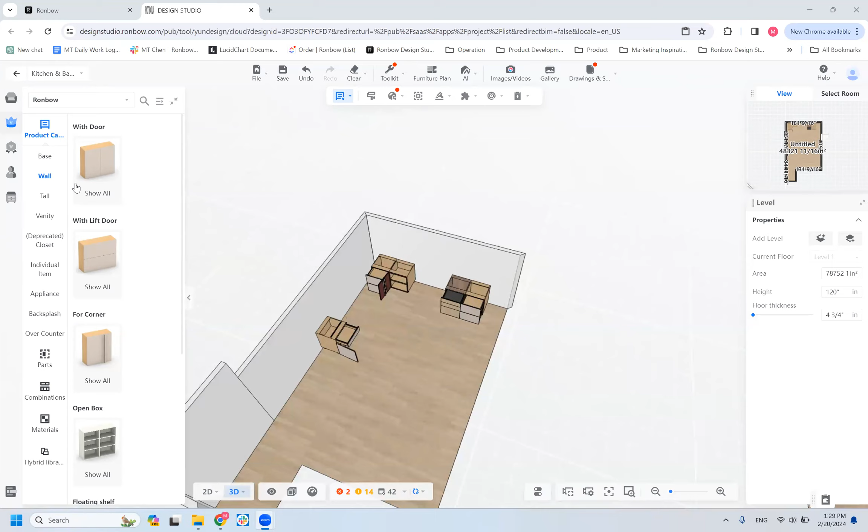Okay, so continuing on all the base cabinets with different functions. We'll briefly go over the cabinet with doors, with drawers, with doors and drawers, and then for sink.

I just want to give special mention to one of these cabinets, this one, B1D farmhouse sink apron. This is designed for apron sink, the farmhouse sink.

So for the apron sink, there are mainly two different types. The first one that's very common - one of the very common apron sinks will have the whole apron finished on all four sides. So basically this kind of apron sink just drops into or sits on top of the base cabinet. For this kind of apron sink design, we basically just use the regular base cabinet and reduce the height of the cabinet, and then this apron sink will just sit on top of that base cabinet.

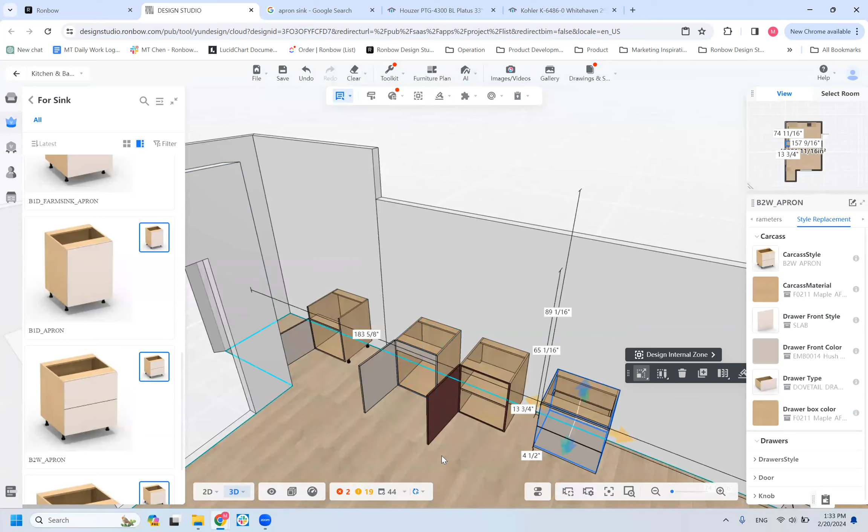Okay, so same thing for this cabinet B2W with apron. So same thing here - inside this cabinet...

Okay, so same thing for the two drawer cabinet. On the right-hand side, this one is the regular base cabinet with two drawers. And then this cabinet on the left-hand side is the base two drawer cabinet with the apron. So that's the apron front inside of the cabinet. And for the cabinet with the drawer, you can see the drawer box height is actually different, right? Because for the regular base cabinet, we want to fully utilize all the space inside this cabinet, so the drawer box will be 10-inch height on both the top and the bottom.

But if you have a cabinet that's designed for sink, well, the first thing is you'll have to change the drawer box to a U-shaped drawer, and we'll go over later on how to change the drawer box to U-shape. But also the height of the drawer box - with this apron sink on top, which is controlling the space that we reserve for the sink, now you can see the drawer box is shorter, to give you enough clearance for your sink on top of this cabinet.

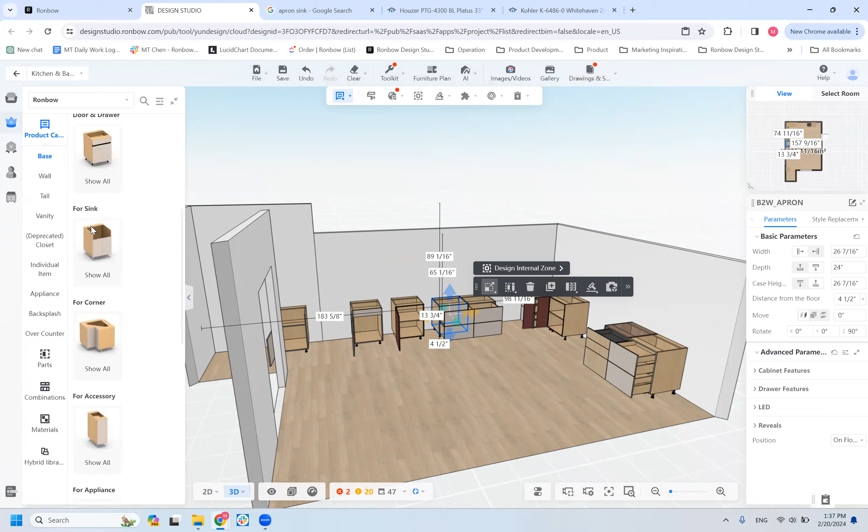So for example, for sink cabinets, one very common design in kitchens is a cabinet with a false front on top, which doesn't have a drawer box, and then a door on the bottom. If I need a cabinet that has a false front on top and two doors on the bottom, I think that's a very common design for a sink cabinet.

What I need to do right here is on this cabinet: as a default, it will have a drawer box on top. So I can go to the bottom left corner, here is the resource manager. All the basic features and style changes, you can change on each single cabinet on the right side toolbar. But if you want to modify anything inside this cabinet, more advanced features, you have to go to the resource manager. It shows here the cabinet I selected, B1W1D.

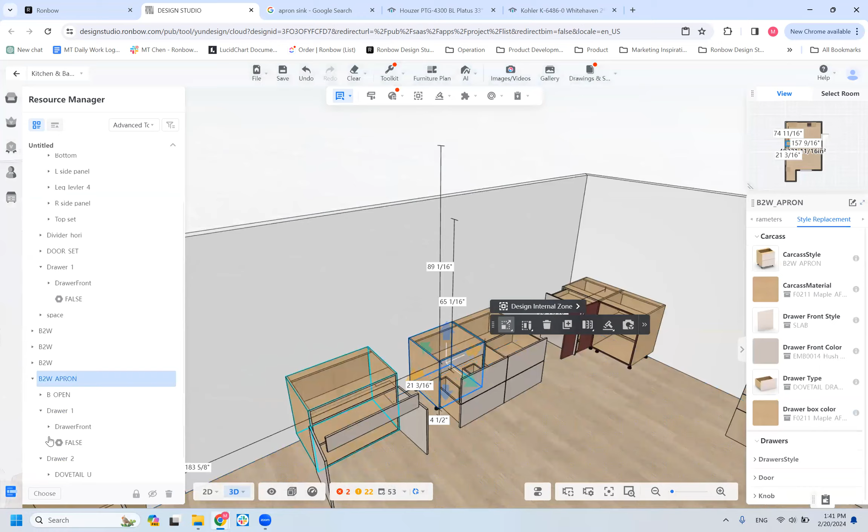And one more thing for the U shape. For example, this two drawer cabinet right here, I have changed my second drawer, drawer two, to a U-shaped drawer. On the left-hand side, the resource manager, the dovetail U for the U-shaped drawer, for drawer two. As a default, the U-shaped cutout will be 10 by 10, meaning the U-shaped cutout will be 10-inch wide and 10-inch depth.

And then you have the drop-down menu right here, and you have the option for a 12 by 12 U-shaped cutout. You can see the cutout is bigger right now, so it will be 12-inch wide, 12-inch depth.

Excuse me, sorry. Ying. Audra's trying to join, it says. Oh, she's texting me. Okay. Thank you. You're welcome.

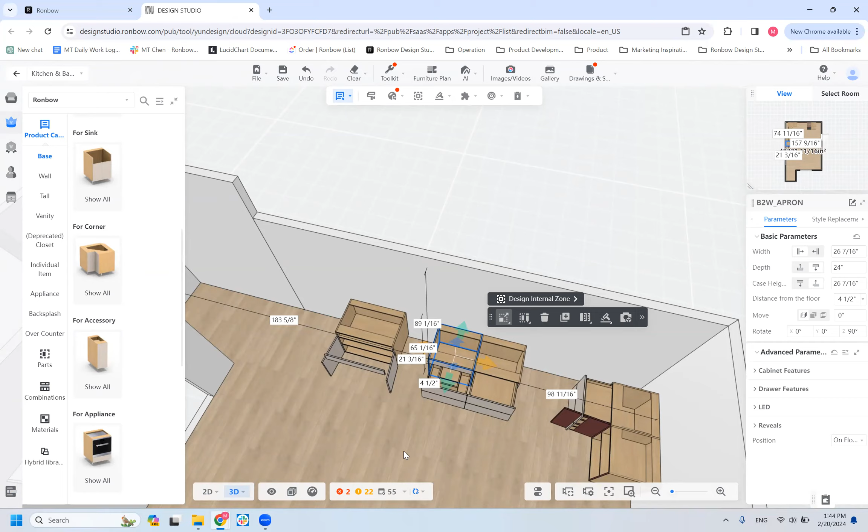With the U shape, how big of a cabinet in width can you use with that? And the U shape is for the sink insert, correct? I'm assuming it's mainly for the P-trap. Oh okay. So it's for the pipe, but what size sink will actually fit in the opening? So basically the size of the sink that will fit still depends on the cabinet width.

Correct, but you still need a U-shaped cutout on the bottom of this cabinet, for the P-trap below the sink. The U-shaped cutout will be on the drawer box. Okay, got it. Now I see it.

So all this modification that I just did - how to change the front, how to change the U-shaped drawer - anything that's inside this resource manager. I know this is a little complicated, more steps than just changing the basic dimensions. So for this part, we have a training document created as a PDF that will introduce step 1, step 2, step 3 - each single step where you need to click. We will share this training document with all the training links after this meeting, so you guys can reference it later on.

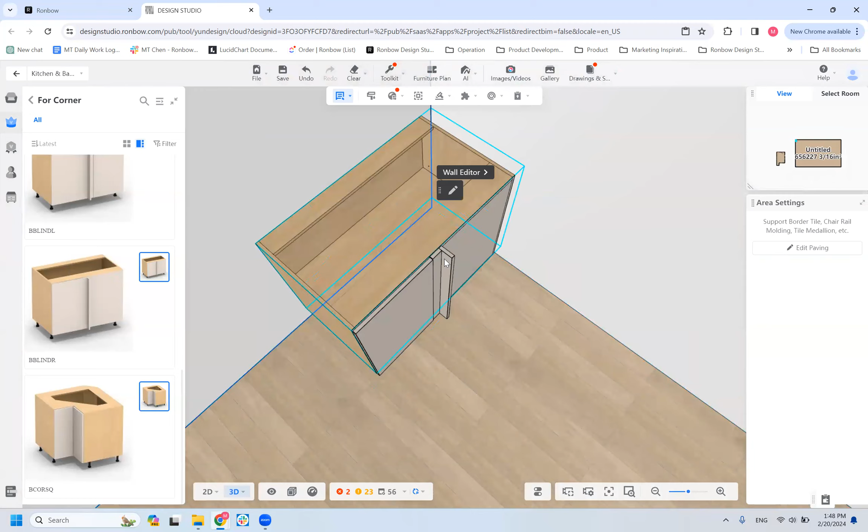This blind corner here already comes with the filler at this corner - not like in 2020 design. Usually for the blind corner cabinet, you have to draw the cabinet and add additional filler on the adjacent side. But in this design studio tool, we already set up this corner cabinet to have this filler attached to the cabinet already, so in your design you don't have to add additional filler in this corner.

Same thing for the space behind this corner cabinet. Usually with 2020 design, for all corner cabinets you have to manually put the cabinet toward a wall and then manually add 3 inches of space behind it. But this is already set up in Design Studio - there will be 3-inch space behind this cabinet already. So you just pull this cabinet and snap it to the wall, and there will be 3-inch space behind this corner cabinet - no need to pull or push it.

As a standard design, yes. But you do have the availability to adjust this filler space. The first thing to mention is the filler width - as mentioned, this cabinet already comes with two fillers. As a default, this filler width will be 3 inches, but you can always modify it from a minimum of 3/4 inch to a maximum of 6 inches.

So just in case some special design requests a bigger space on the corner, here is how you can adjust the filler width. But keep in mind the filler width will be adjusted on both sides at the same time, because we want to ensure a symmetrical design. But as a standard, it will be 3 inches.

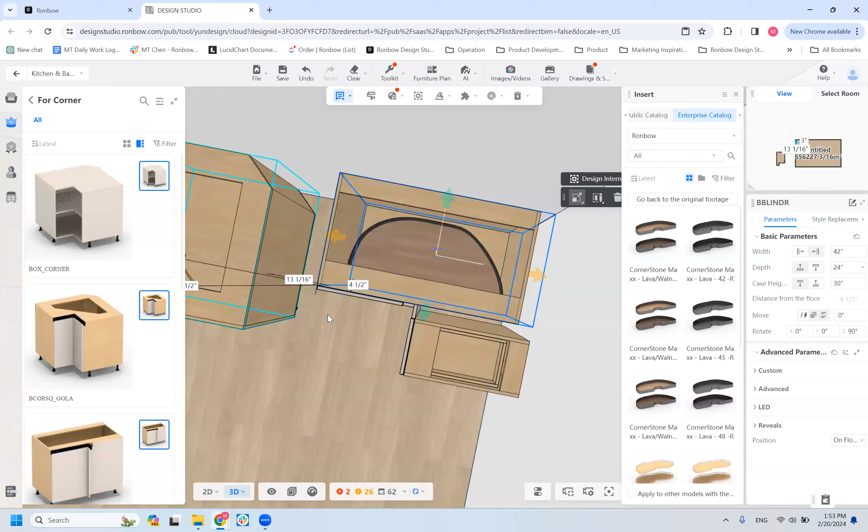I have a question if you can hear me. Yes. Is there a catalog that we can reference, like a paper catalog? When we're designing this, do we have some type of material to reference? You mean like what kind? You mean a physical one? Like let's say the first top one, the Cornerstone Lava Walnut, whatever.

If you click on it, either one, doesn't matter. So click on it. Yeah, I read it. It gives you a little bit of information on it, but if we're not sure which one to use, is there documentation that we can reference, what kind of catalog information?

What kind of reference are you looking for? For example, Cornerstone Max Lava 42R. What does that mean, R? I'm assuming it's right, I understand that. Yes, but so what does that mean in my design? So the Cornerstone Max basically is the name for this accessory, and then Lava is this color name.

What is it made out of? How do we know? Okay, yeah, exactly. How do we know how to pick it and which one to pick? And if we had like a catalog or something, like a Blum catalog, for example, when you open it, you have the description of the product and you know what to select.

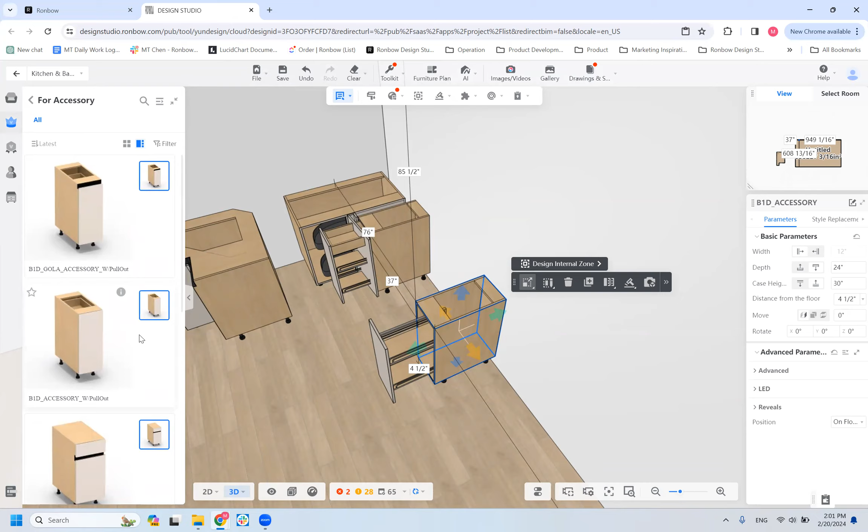For accessory cabinets, there are different designs: starting with the base cabinet for four-high door, then the base cabinet for four-high door with one door on the bottom and one drawer on top, for four-high door Gola with one door and one drawer, and four-high door with drawers on top. This one here is with the pull-out drawer on top. With all these different cabinets for accessories, each has a different internal opening height. For example, this four-high door has the full 30-inch height access for accessories, but this one, the four-high door with one roll-out drawer on top, the roll-out drawer takes up lots of space, so not all accessories are able to fit underneath it.

Inside this cabinet, once I click on it and go to style replacement, you will see all the accessory options here. We don't have all the information listed, but you can see the description, the metal space pullout, and the size of the pullout. This number here references the width of the cabinet. When I select a different width of accessory, for example this one for 24, my cabinet's width changes to 24. So the cabinet width on the accessory cabinet is according to the accessory you have selected.

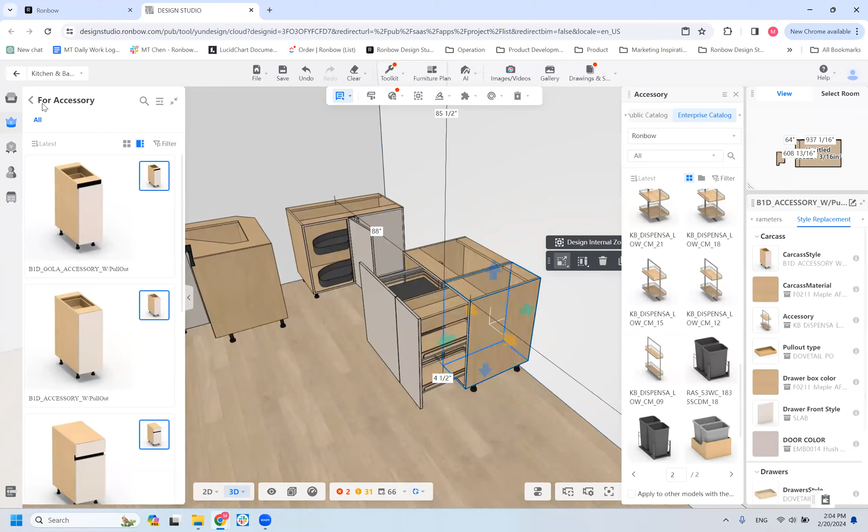Okay, so move on to the next one for appliances. So for the appliances cabinet, same thing, there is different configuration.

So we have the one drawer on top of the appliances. So all these are base appliances cabinets, okay? We have one drawer on top of the appliances, a filler on top of the appliances, one drawer on the bottom of the appliances with Gola, one drawer on top, one drawer on bottom, two drawer, and then one drawer on the bottom. Okay, so for all the appliances cabinets,

Once you place your cabinet in your drawing, right here, here's the thing I want to mention. So all these dimensions here, so the cabinet height is basically the overall height of the cabinet, which will be the same as other cabinets.

Okay, so this drawer box height right here is basically controlled by these appliances, right? So the designer does not have control on this drawer box height.

So how we set up in the design studio is that for all the appliances cabinets with this kind of built-in appliances, you have this option right here called appliances. Once you click on this appliances, you'll see all the appliances options.

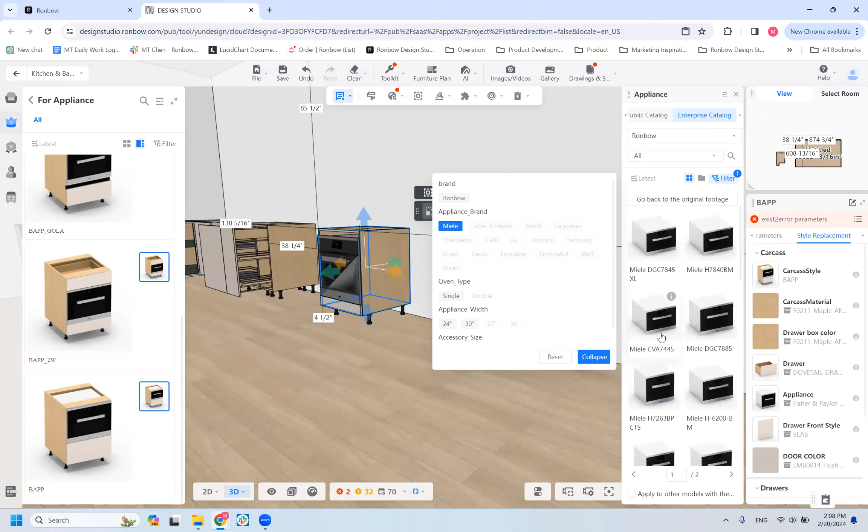So the appliance request form is something separate from the design software? Yes, it's a form that you guys have to fill in, but it's just basically — you just need to fill in the brand of the appliance and the appliance model number. Okay, yeah.

Okay, any other questions on the appliances cabinet?

Okay, so the next cabinet on the base cabinet will be the open box.

Okay, so for the open box cabinet, a very important thing to mention: for the regular base cabinet, the width, depth, and height all reference the cabinet carcass, the cabinet body. So the cabinet depth of 24 does not include the door, it's for the cabinet body only. But for the open box, we want to make sure the front of the open box is aligned with the cabinet door, not the cabinet carcass, so everything is set flush.

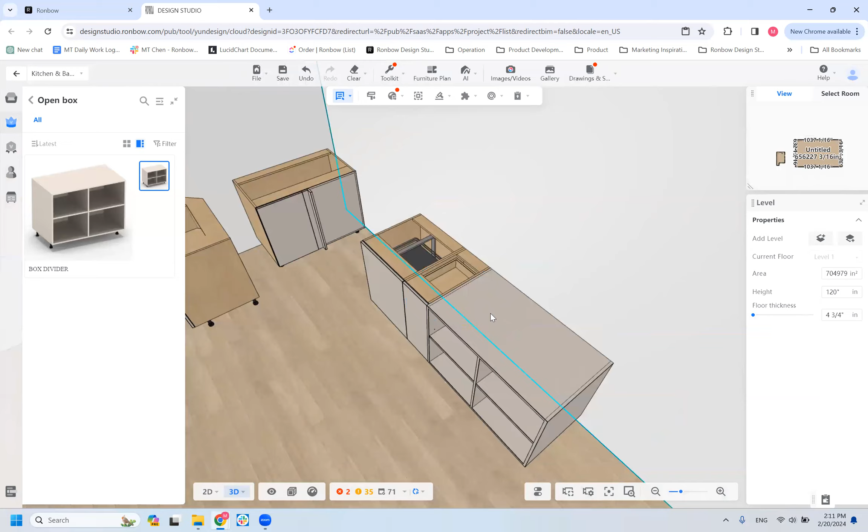So it's easier - when you're modifying your base cabinet to, let's say, a 26-inch depth, and you have an open box right next to that base cabinet, you don't have to manually calculate the depth needed to align with that 26-inch cabinet plus the door bumper. You basically set the open box to the same depth as your base cabinet, whichever depth you want to align with, and the system will automatically calculate the front edge right here.

Okay, so for this open box, this feature right here is called a divider. It's the same for the open box and all the wall cabinets. Once the cabinet is bigger than 42 inches wide, you will automatically have a vertical divider in the middle of the cabinet. You can always change the number of dividers. Since my cabinet size is now 44, bigger than 42, the minimum divider we'll have is 1, and I can change it up to 4 dividers inside this cabinet.

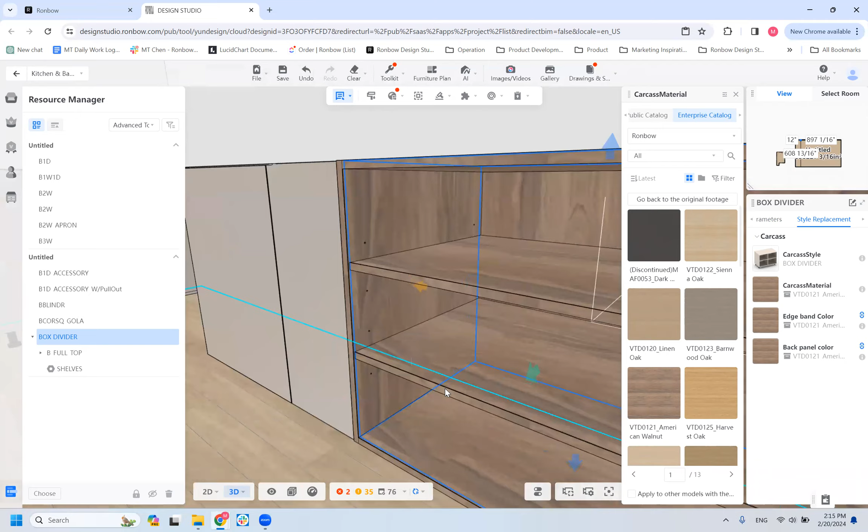But what if I just wanted the interior a different finish than the outside? That's currently not available - for the open box, you're seeing the same finish on both sides. You mean a different finish for the shelf only, or just the interior, the shelves and interior of the cabinet? That basically depends on the material you're using. For this open box, if I select American walnut, this material has the same finish on both sides, so you'll basically see the same finish inside and outside - there's no difference, no different finish on both sides.

But when we're using a matte finish material - still on the drawing it shows the same - but right here you'll see an option: finish side facing in or finish side facing out. This finish side tells you that most wood textures have the same finish, same texture, on both sides. But for high gloss and matte materials, the high gloss or matte finish side is only on one side, so that's something you can change - the matte finish can be on the inside of the cabinet or on the outside. But it still has the same color.

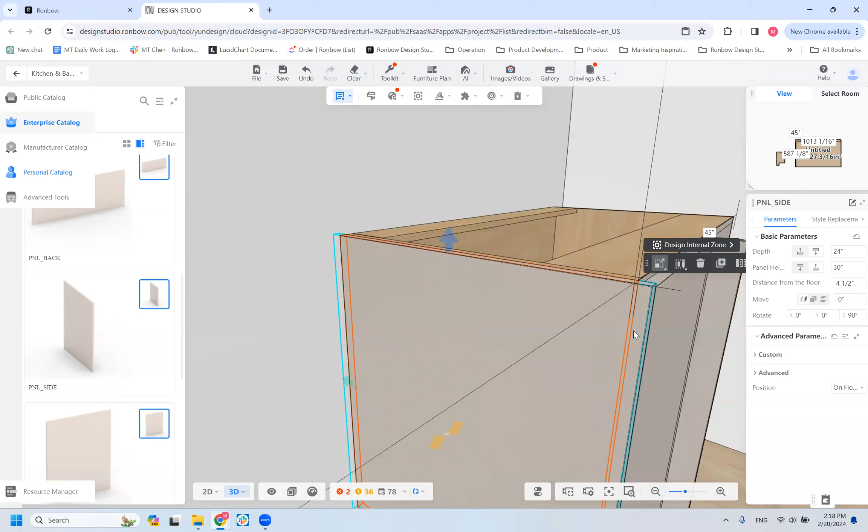And then you see the space between the red line and the green line right here, that's the overlay that the engineer team has already preset in the design software. That's something that helps you with the design. Doesn't matter what your cabinet size is, the side panel will always be flush with the cabinet door, the front edge right here.

One thing in the advanced tool: all the side panels will have a depth oversize of 1 inch and a height oversize of 1 inch. You can see the drawing right here, the green line behind this panel is kind of sticking inside to the wall. That's something that's designed for all the side panels.

For example, this panel right here, you have a cabinet that's 24-inch depth. This front overlay is calculated with the door thickness of 3/4 inch plus the door bumper of 1/8 inch, so a total of 7/8 of an inch on top of that 24-inch depth. But the real panel that we send out to the customer will have an additional 1 inch on this depth, since not all walls are perfectly straight - I would say none of the walls are perfectly straight. So all the side panels we provide will have this extra 1 inch depth, and the contractor will have to trim the panel on site during installation.

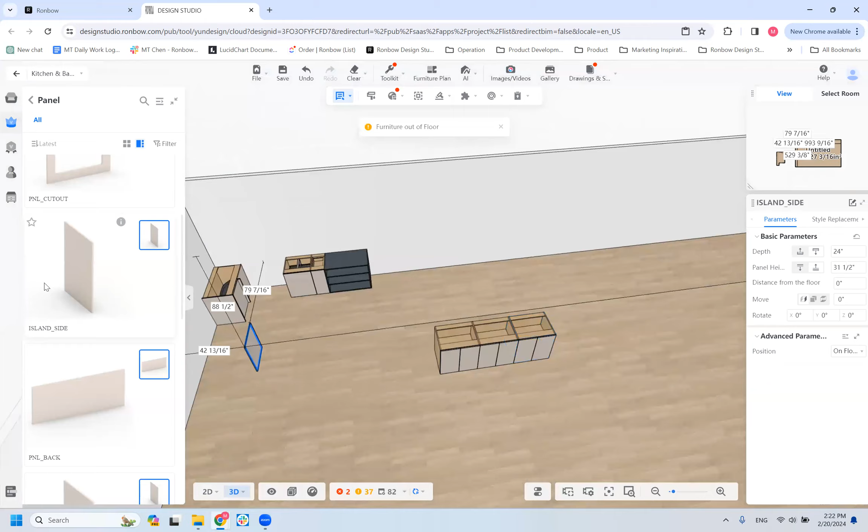Okay, we'll move on to the island side panel. For the island cabinets - for example, I have an island designed in the middle of the room. The island side panel will be attached to the side of the island. No questions?

So the difference between this base side panel and this island side panel is that for the base cabinet side panel, since one of the edges is attached to the wall, the contractor will have to trim, modify this panel on site, and the edge that has been cut will be attached to the wall - so it's not going to be visible after installation.

But for the island side panel, both the front edge and the back edge will be exposed after installation, since this panel is not attached to any wall. So this island side panel will have to be exact size, and the contractor will not need to trim this panel on site.

For this panel, this blue line right here is the depth of the cabinet, so it will be aligned with the 24-inch depth cabinet. On the front here, you'll see the overlay, which is aligned with the cabinet door - that'd be 7/8.

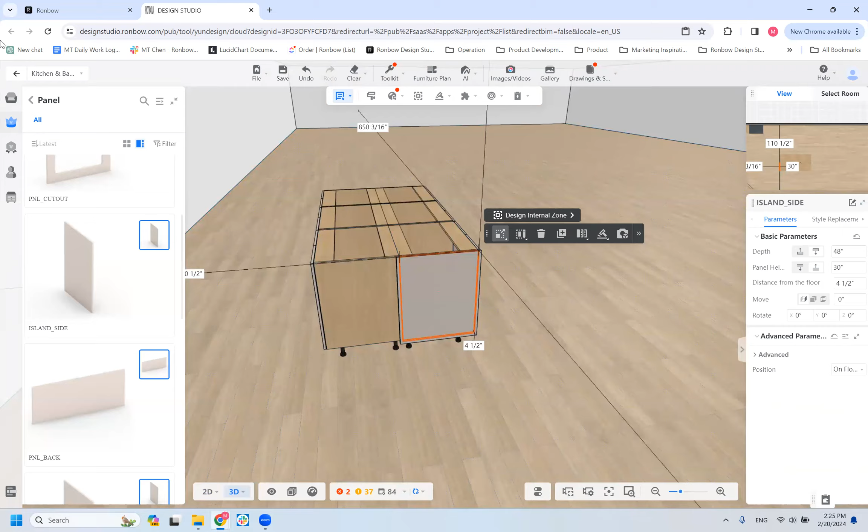So to move this panel in this situation, I want my panel to be the same location as my cabinet. So when I click on this cabinet, it shows me from this cabinet to this wall the dimension is 86.5. And then I just need to click on my panel, same thing here, 86.5. So now my panel is in the same location, the same placement as my cabinets.

And back to the 3D view. So for this island side panel, the panel width will be the two cabinets' depth plus the front and the back reveal. Any questions on the island side panel?

And then again, since this panel has to be the exact width, the contractor cannot trim this panel on site. Both the front and the back edge have to be finished edges. So there's no oversized option on the width, but it does have the oversized option on the height. So you can either have this panel the same height as the cabinet, or you can have this panel go all the way down to the floor.

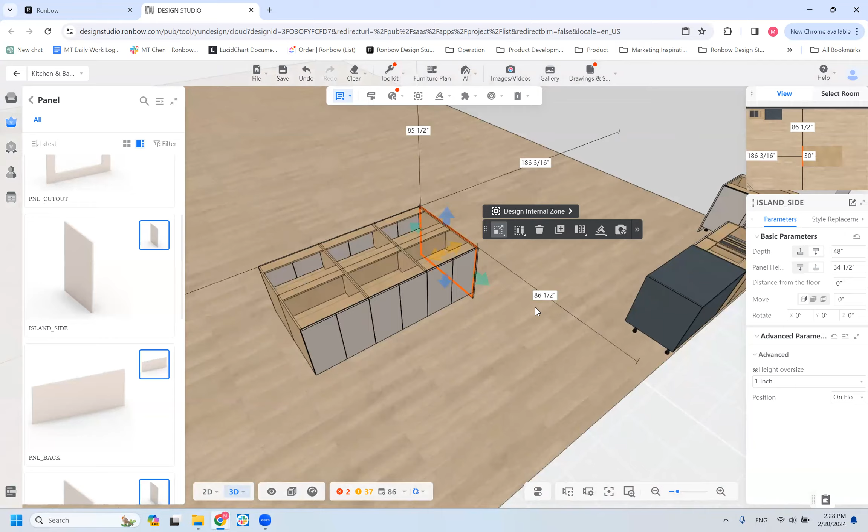Was it finished on the other side of the panel, like when the door opens? Can you see? Yes. Is it the whole panel or just like an inch of it or something?

Yeah, it's just a regular panel, so I can move it over here. So yes, it does have finish on both sides, but just keep in mind for the high gloss and matte material, the high gloss or matte finish is only on one side. So one side will have the matte or high gloss PET, and the other side will just have the melamine with the matching material.

Okay, so when the contractor is doing the installation, they will definitely want the matte finish or the high gloss finish side facing out, to be the exposed side that we'll see. I see. Okay.

And then move on to the next one. Same thing on the island. Let me change my island design. Just give me a second.

Okay, so another situation on your island design, you might have end panels on both sides. And then on the back, I don't have another row of cabinets, I just have a back panel on the back of my cabinets. So here's a panel back, which will be the panel that can be used on the back of your island.

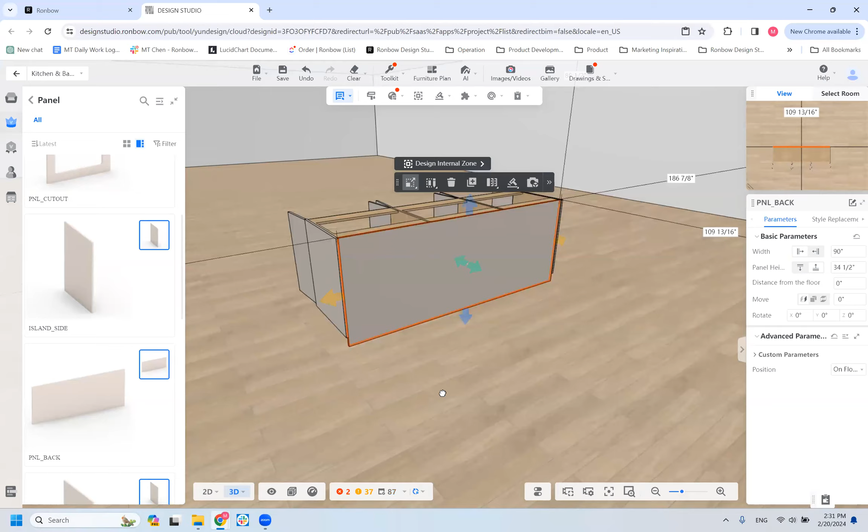Okay, so here's the island back panel. For this panel, we usually just provide the exact height and width, because there's no additional calculation—it's just the 3 cabinets adding up together. So there's no preset overlay for the front, unlike the side panel, which always has a preset for the front edge and back edge. But for the back panel, that's the dimension you get. So for this design, my cabinets are 30 inch, 30 inch, 30 inch, so the total is 90 inch width. That's it, there's no additional reveals or oversize.

But here is an option for you to add oversize, just in case some customer might worry that on the job site there might be some miscuts or something. If the customer prefers to have oversize, you can always change that here. You have the option for oversize height and oversize width.

One more thing I want to mention about this panel: for the material, as a default, all wood texture material will have a vertical grain. Once I select a wooden texture for this panel, it will automatically give me a horizontal grain. The reason is that with a vertical grain, the maximum width of this material only goes up to 48 inches wide.

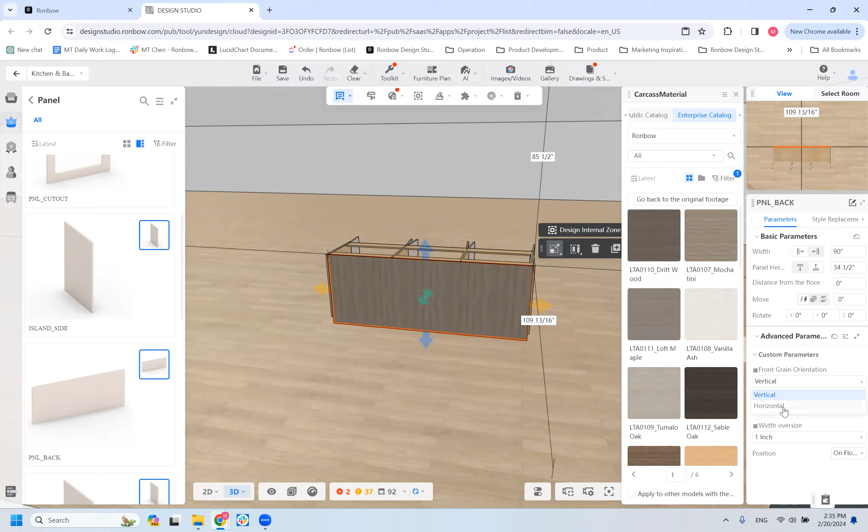So what do we use to seam that if we go with two 48-inch panels? You mean how to do the two panels? Well, you're gonna have a seam in the center, right? Yes, yes, what would you do there? Avoid it at all costs, but vertical may be the way to go because the side panels and the rest of the kitchen are most likely gonna be vertical.

So since this issue only appears on the wood texture panel—if it's a solid color, it doesn't matter what direction, right? And since there's no grain... for the solid color, since there won't be any grain, there won't be any issue when you have a 90-inch wide panel. But for anything with grain, yes, you will have to break it into two panels if it exceeds the maximum width.

But we have a couple of this kind of design situation in our showroom. With all these wood textures, I wouldn't say the seam is very noticeable, so it depends on the customer if it's acceptable for them. If they wanted vertical, we'd have to use 48-inch panels.

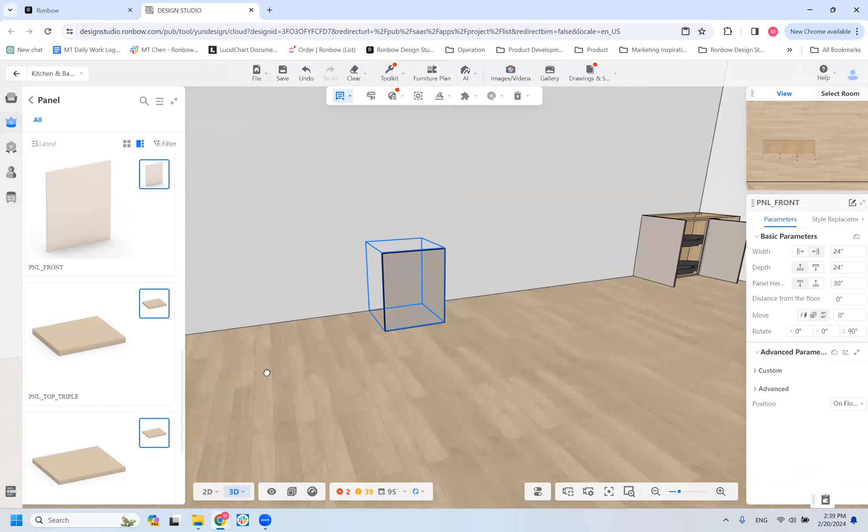Next, I want to go over the panel front. The panel front is basically a front panel, designed for appliances that require a custom panel ready front. So that can be used for the custom panel.

For example, if the customer is using a panel ready dishwasher, then you should be using this panel front as the dishwasher panel.

The width and height of this front panel will always be set the same as our cabinet carcase width and height. And on the bottom here, this front panel will have the same reveal as all the base cabinets.

Earlier, when we used the side panel or the island panel, there's no reveal on those panels - the side panel and the back panel have no reveal. But this front panel does have reveal for the top, bottom, left, and right, set up with the same reveal as the base cabinet.

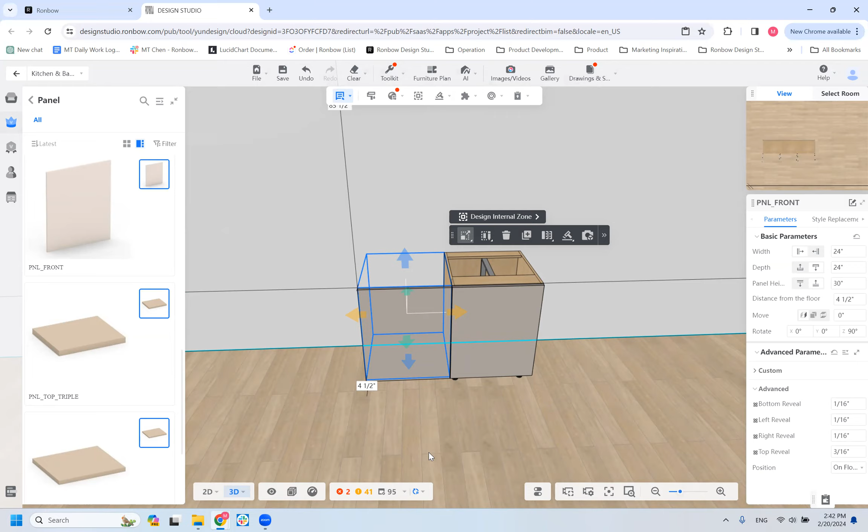For most appliances, most dishwashers, this standard reveal will work. But for some special dishwashers, like a dishwasher drawer, which won't be the same height as our base or high door cabinet, don't expect those kinds of appliances to align with our cabinet - or you have to adjust the cabinet height, like the drawer height, to align with that drawer dishwasher.

Otherwise, for most appliances, we'll just be using our standard reveal, and the door height will be the same height as our cabinet. If you have any special appliances, like a dishwasher drawer, you have to follow their spec to input the width and height of the panel based on the spec requirement, and in that case you'll have to remove all the reveals on the bottom.

So that's the front panel. And then we have another panel that's very similar, which is this panel cutout.

It's also a front panel, but designed for the front panel of the wine cooler. A lot of times the wine cooler will have a cutout at the center for the glass insert. So this panel is a front panel with a center cutout.

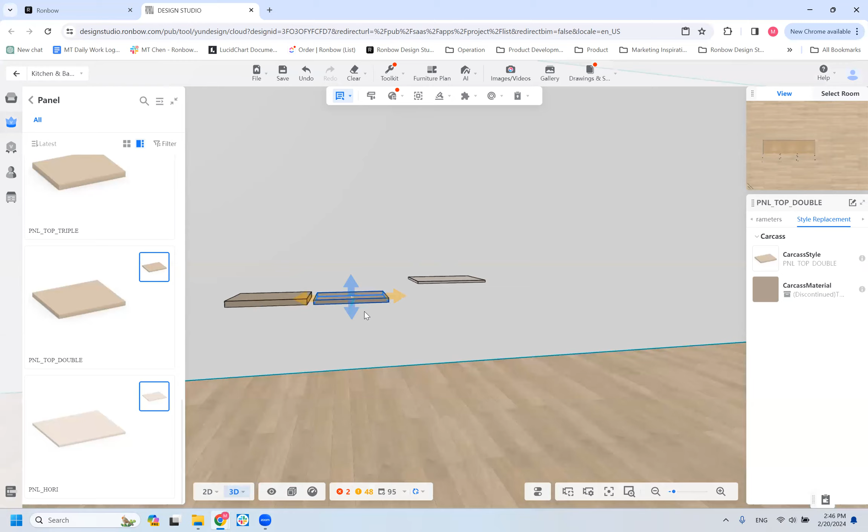And then we have this panel with double layer, panel top double, and we have the panel top triple. The double layer will just be 2 layers of the 3/4 inch panel, which means the thickness of the panel will be 1.5 inch. That's the thickness of the panel. And then we have the triple layer, which is basically 2 of the 3/4 inch material plus 1 of the 1/2 inch material. So triple layer means 2 inch thickness.

One thing I want to mention for the horizontal panel: when we have a single layer horizontal panel, in the style replacement you can basically find all the material options. You can use any of the material for this single layered regular horizontal panel, because it's just a regular panel. And then if you have a double layer or triple layer panel, you can see the material option is a lot less than the single layer horizontal panel.

For the double layer or triple layer horizontal panel, we need to make sure that on the edge of that panel there's edge banding on all edges of the panel. Because even though it's 2 layers of material stacked together, we don't want to see 2 lines of edge banding on the side. So for the double panel and triple panel, we want to make sure this material itself comes with the 1.5 inch edge band or 2 inch edge band. That's why there is a material limitation on these 2 products. All the material options you see in this product basically means all these materials will have the 1.5 or 2 inch edge banding. So there's a limitation on this product itself.

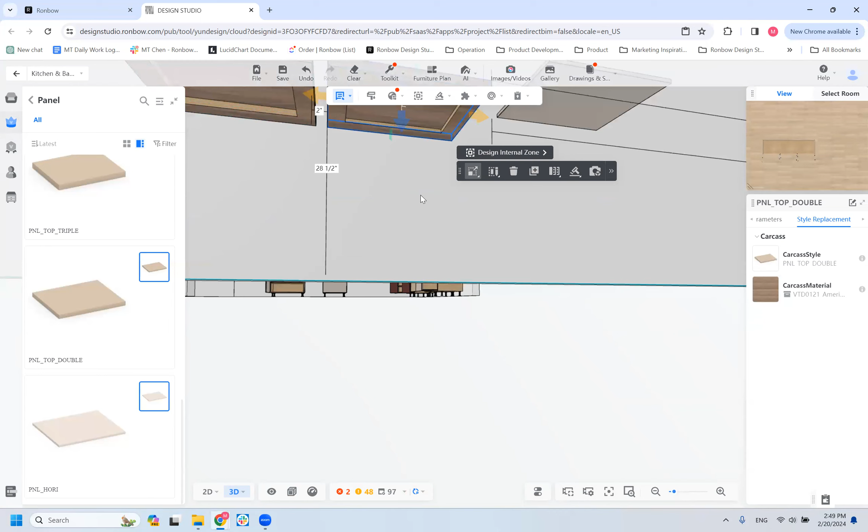Also on the bottom of the panel in this rendering, you see that for a single layer panel, it's just a solid panel, right? It's just a regular panel, like you just use it horizontally. But for this double layer and triple layer tabletop, since it's going to be used as a tabletop or on the island, on the bottom it won't be visible. It kind of has a frame on the bottom. It's not a solid material with double or triple layer, so it does have a frame on the bottom, and you will see the internal edge is not edge banded. So if you're using this horizontal panel, only use it for a tabletop. Do not use it above the eye level. Does that make sense?

Okay, so let me go to the showroom. Oh, sorry.

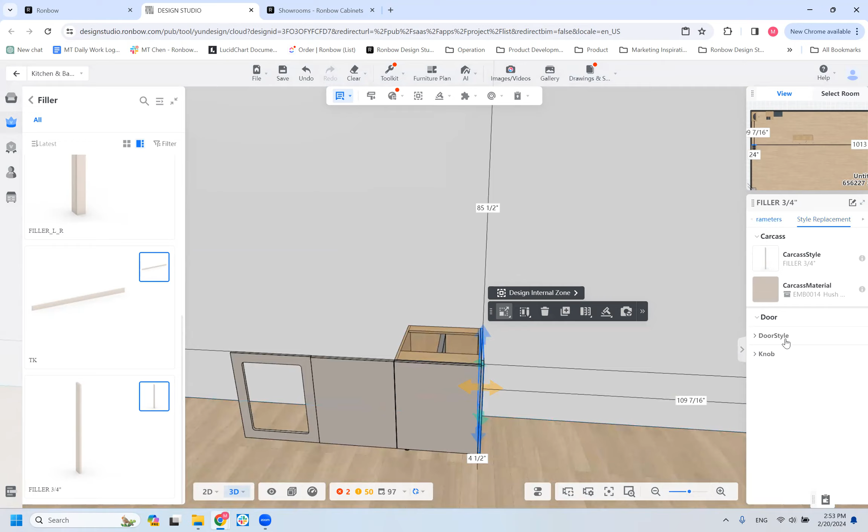Right here you can change the filler depth, which is this dimension right here. The default is 3 inch, but when I change it to 6 inch, you can see that's the depth of the filler. The front still remains at 3/4 inch. So that's the first filler, the 3/4 inch filler.

And then we have the second one right here, filler 1 inch to 2 inch. This filler is more commonly used in between the cabinet and the wall. For this filler, we basically just use it horizontally. The customer or the contractor will have to trim this filler on site.

Right here you can change the width of the filler from 1 inch to 2 inch. That's basically the limitation on this 1 to 2 inch filler. Now you can see the width of the filler has been changed. So now, questions - if there's a filler space that is more than 2 inch...

...which is very common when we have a cabinet against the wall, then we need to use this filler L shape - the L shape filler. For the L shape filler, we have filler left and filler right. The left side filler, the filler L, will be installed on the left side of the cabinet. The filler R, the right side filler, will be installed on the right side of the cabinet.

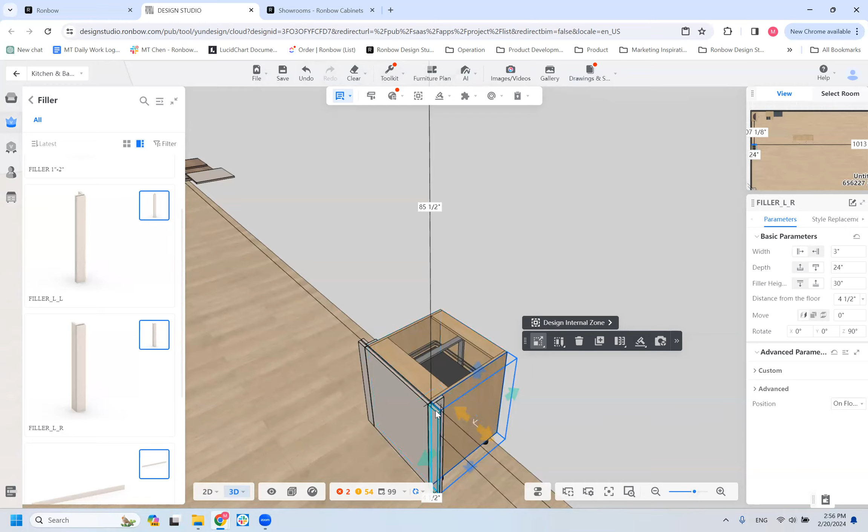Actually, we just updated this last week, so the drawing should be updated as well - I think the engineer team will be working on it this week. The L-shaped filler, when we ship it out, comes with 2 components: one is the side panel, one is the front panel. The contractor, the cabinet installer, will have to align the side panel to our cabinet body and then attach the front panel to the side panel, so that everything is flush with the cabinet door.

Does that filler have an overlay on it, or is it just one front filler, because right now it looks like 3 pieces? The new structure of the L-shaped filler should just be 2 pieces only - we just updated this structure last week. The engineer team should be working on this design studio drawing this week.

Actually the new L-shaped filler should be able to cut down the minimum to 1 inch, but with the old design, since the hardware on the back is already 1 inch wide, basically you cannot cut this filler anything less than 1.5 inch. That's why the minimum on this L-shaped filler is 2 inch.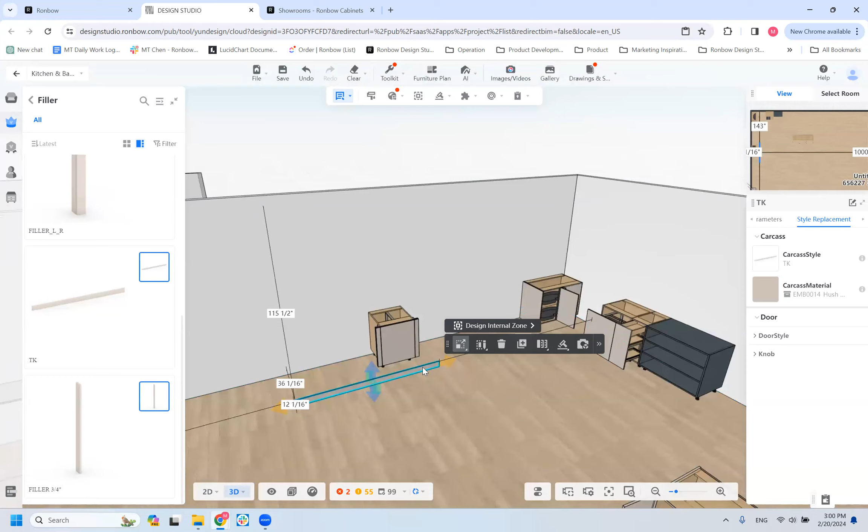We have two more categories for base cabinets. One is the cabinet for cooktop, which is a combination model that the engineering team has created for the engineer team. This cabinet for cooktop is basically the same cabinet we use, the D1, D1W, just the base cabinet with drawers on top and doors on the bottom. The only difference is that since you're going to put a cooktop on top of this cabinet, there won't be anything inside of this drawer, so the drawer will just be a false panel.

So what they did on this cabinet, B1W1D, 1W1D for the cooktop, is they changed the preset default setting so the top drawer has already been removed. As we mentioned, when we go over the cabinet for sink, you have to remove the top drawer box and change it to a false front, but for a cooktop the engineering team has already changed the default value for all designers, so you can just pull the cabinet and it's ready to use.

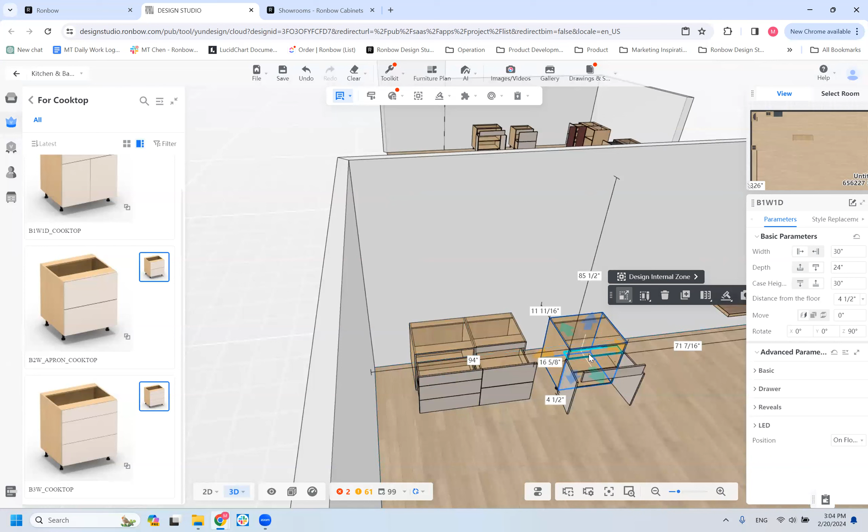But for example, this cabinet right here, the cooktop cabinet with 3 drawers, the top drawer box will have to be removed. So you can see on the side, the top drawer will just be the false front panel, there's no drawer behind. On the bottom 2 drawers, we have already done a preset on the bottom 2 drawers.

So there will be additional space behind the drawer box. For a regular base cabinet, if the cabinet is 24-inch depth, the drawer box will always be 21-inch depth. But if it's a cabinet designed for a cooktop or range top, with the drawer box on the bottom, the drawer box will always be 18-inch or less. This gives more clearance behind the drawer box for any electrical or gas pipeline, stuff like that. That's already preset in this cabinet. So for the cooktop and range top cabinet, the drawer box will always be 18-inch.

And if you want to make this drawer box even smaller, yes, you do have that option right here. You can always add more space behind this drawer to make the drawer box smaller.

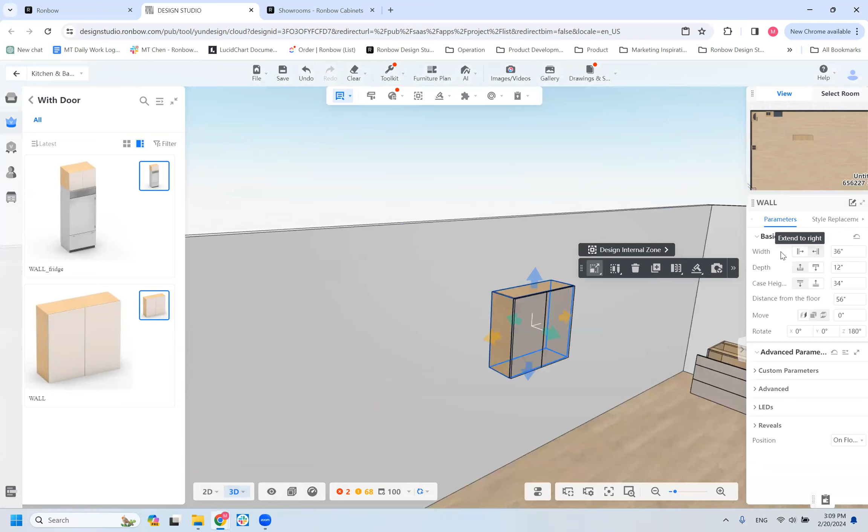Same thing, we go over all the very basic functions of this wall cabinet. You can change the wall width, depth, and height of this cabinet. You can always change the distance above the floor to any distance you need. And once you snap the second wall cabinet, it will automatically snap to the same height.

So for the custom features, the more advanced features for the wall cabinet, the first custom feature you'll see here is the wall bottom up. That's one of the options for handleless that we mentioned previously in the product training. Down here you have the drop down menu. As a default there won't be any wall bottom up, but you have options from 5/16 all the way up to 1.5 inch. When I select 1 inch wall bottom up, you can see the change on this cabinet -- the bottom panel of this cabinet will be moved up 1 inch.

So basically the door front of this cabinet stays the same, does not change. The wall bottom up value controls the height of the cabinet box. Okay, no question on this?

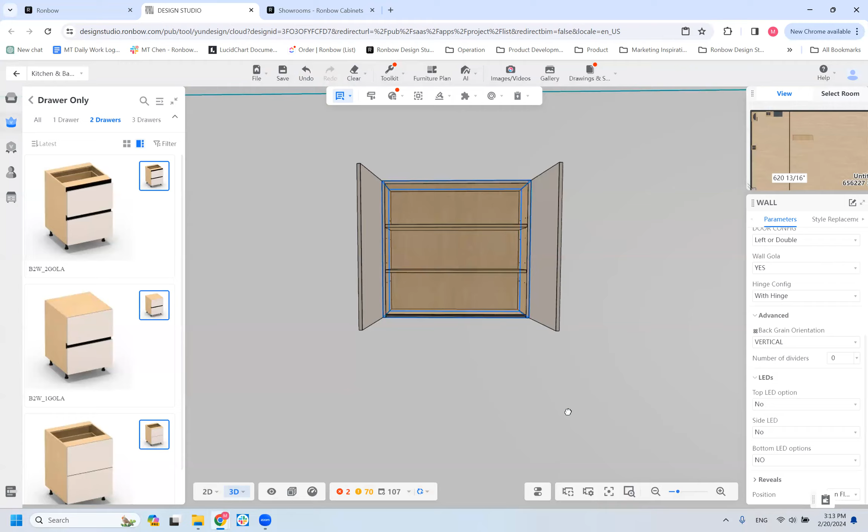Next I want to go over the LED options in the wall cabinet. Earlier for the base cabinet, we only have the bottom LED, which is the toe-kick LED for the base cabinet. But for the wall cabinet, we have the top LED, the side LED, and the bottom LED.

The top LED will be the LED on the internal top. Give me one second, give me one minute, let me mute my mic for a minute.

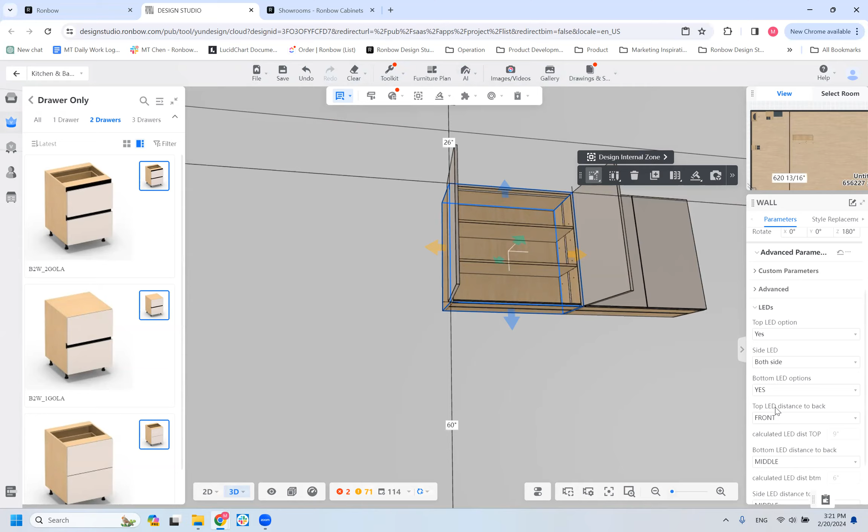Another thing about the LED - when you have LED inside the wall cabinet, on top and on the side - for the side LED, you have the option of LED on the left side or right side only, or you can have LED on both sides. So when you have LED inside the wall cabinet for both the top and the side, make sure you select the same location for the LED.

Do not do something like this - have different LED locations, one in the middle, one in the front. It's very difficult for the contractor to route through twice on each cabinet to get the LED connected. So make sure that if you have LED on both the top and the side, they are in the same location.

In this case, the side LED and the top LED can all be connected together at once. They don't need to do additional routing. Any questions on the wall LED option?

Going back to the advanced tool - next I want to go over the wall cabinet with the flip-top option. The first one is the Aventos HK, which is the single lift-up cabinet.

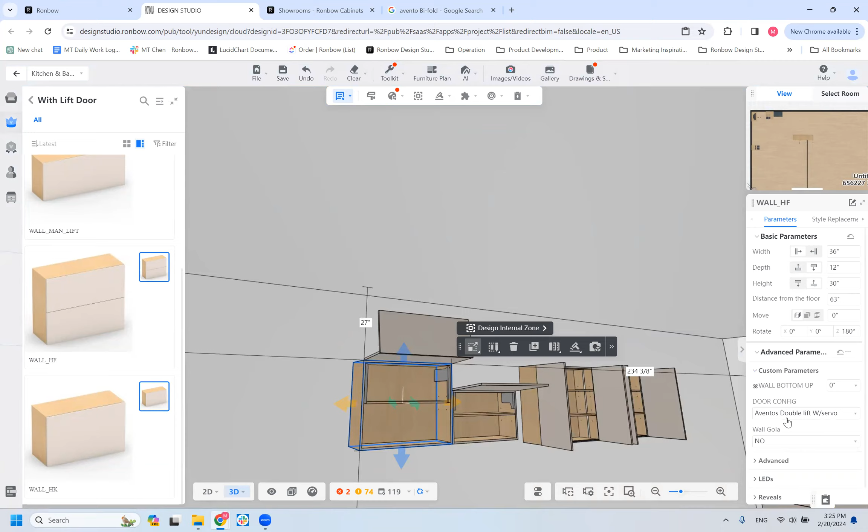Same thing here - it does have the wall bottom up feature, but for this bifold cabinet, the bifold hardware does not work with tip-on. So you will not find the hinge option with tip-on on this cabinet. If the customer wants the handleless solution on this cabinet, either they can do the wall bottom up, or they will have to go with the electrical servo option for the bifold cabinet.

Any questions on these two wall lift-up cabinets?

One more thing about the wall lift-up cabinets - for the regular wall cabinet, the width limitation, you can design all the way from 9-inch wide to 72-inch wide, even with a vertical partition in the middle of the cabinet. And the height can go all the way from 9-inch to 60-inch for the wall cabinet.

But for these two flip-up cabinets, the Aventos HK height limitation is from 10-inch to 24-inch, and the width is basically from 9-inch to the maximum panel width. This is due to the limitation of the hardware itself - the Aventos HK hardware does not allow a door height beyond 24-inch, so that's the limitation on this cabinet.

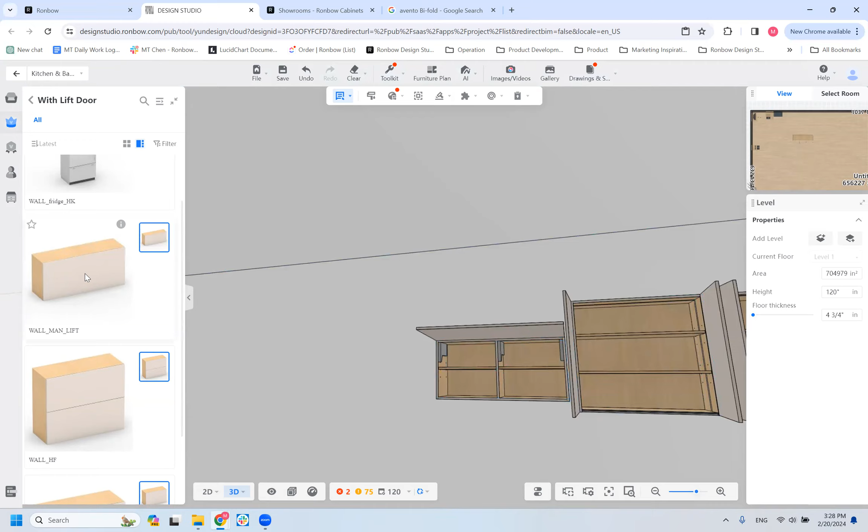That's due to the hardware limitation. When you have a cabinet wider than 42 inches, two hardware pieces are not enough to support this door.

So that's why we designed this wall cabinet manual lift. It's not like the Aventos HK cabinet, where when you open it, it stays at a certain angle, and when you try to close it, you just push on it, flip it down, it's done. But this cabinet, the manual lift, you can see the inside - here's the hardware we use. Basically you have to manually lift up this cabinet, you'll hear the click sound and then it stops at the certain angle. Then to close it down, do you see the two knobs inside this cabinet? You basically have to manually pull the two knobs on the side at the same time in order to close up the door.

The reason we designed this cabinet is only for hood cabinet use. It's very common right now for a customer using a range top or cooktop that will go with a hood that's 48 inches wide. If you have a wall HK cabinet that's 48 inches to match the hood, there will be a middle partition - the vertical partition at the center of the cabinet - which, when you install the hood, you want to remove in order for the ventilation to come out from this cabinet.

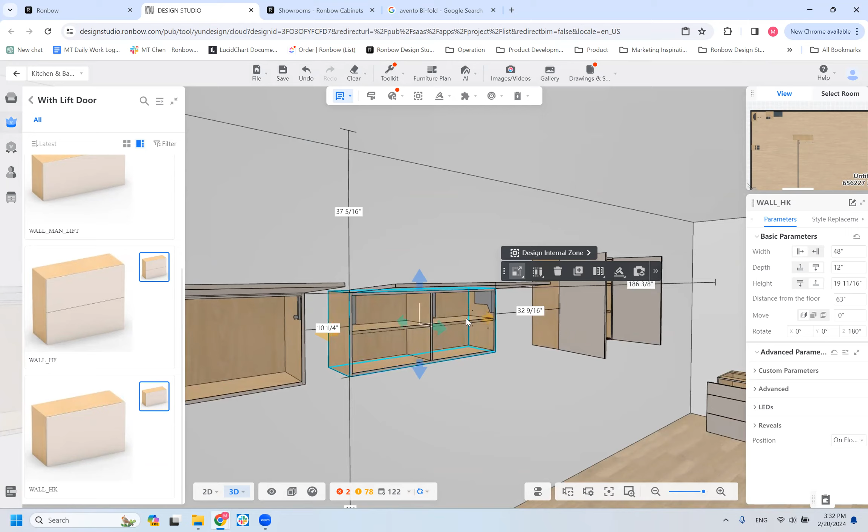Yes, that's a nice question - I forgot to mention this part. For this lift up door, basically for the single lift up, the hardware itself allows you to adjust the opening angle of the door. Same thing for this HK, it's inside this hardware. After the contractor does the installation, they can always manually adjust the power factor on this hardware to control the opening angle of the door. So if you don't have enough clearance, just make sure the door opens at 90 degrees so it won't hit the ceiling.

For this bifold door, since it's going up this way, yes, it does require more space above the cabinet between the ceiling. What we did on the bifold cabinet, as a default, is always send it out with the angle restriction clip. I'd say usually for the bifold cabinet, you want to leave at least 6 to 10 inches of space above the cabinet. But if the customer doesn't have enough clearance on top of the cabinet but still wants this bifold design, then we'll just provide the angle restriction clip to have this bifold door stop at, I believe, 89 degrees.

So can we stack two of the regular cabinets on the right side of the bifold instead? Sorry, stack two cabinets on the right side of the bifold. No, the ones you were showing us, the single one you have right there. Can we stack two of those on top of each other instead?

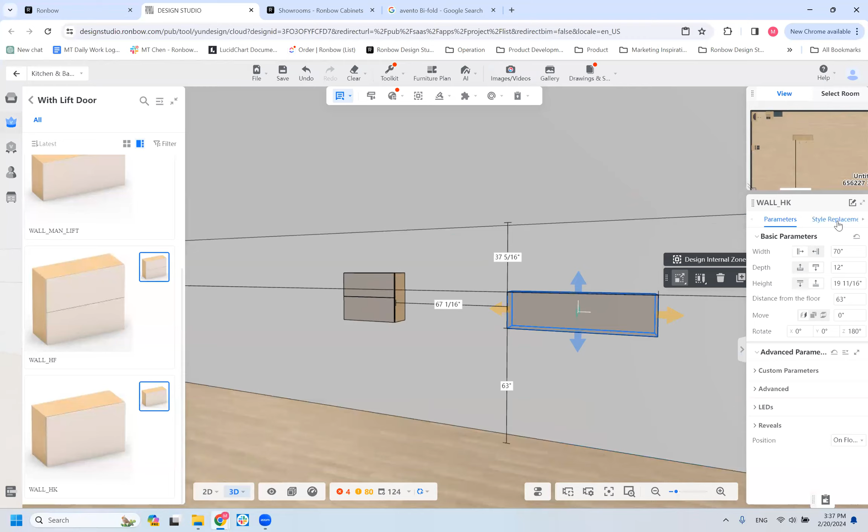Okay, and then for the glass door, same thing in the style replacement, the door style, you'll be able to find the glass door option.

Perfect, and the glass door can also go up to 96 inches or no? Depends on the glass door profile. I know there's a couple of glass door profiles that don't go up to 96. So we have the glass door spec, so here.

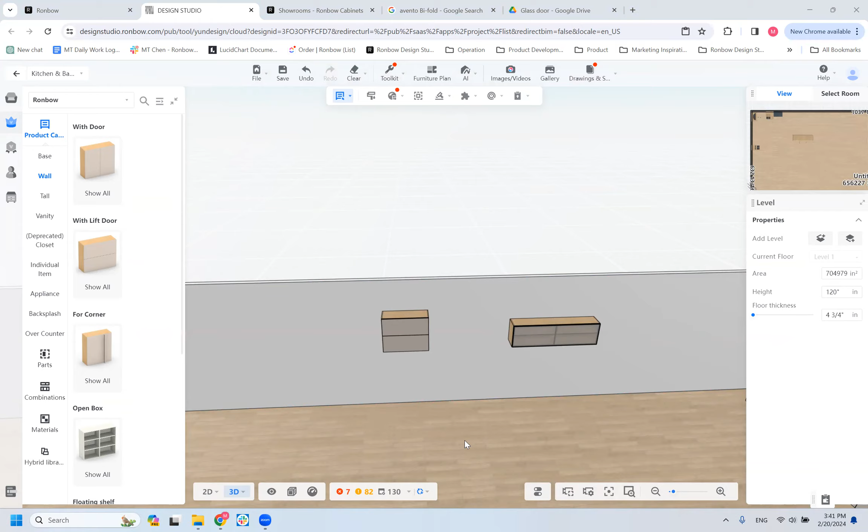Is there any questions on the wall cabinet lift up or regular wall cabinet? Okay, so let's move on to the wall corner cabinet.

So basically, we don't really have to use any fillers because the cabinets can be adjusted to size, except for the ends and stuff. Yes, I would say most of the time we only use fillers between the cabinet and the wall, and sometimes there might be filler requests between the cabinet and the appliances. But I won't say you don't need fillers at all, because you still need to use some fillers in your design.

So again, for the wall corner cabinets, it's very similar to the base blind corner cabinet and base corner cabinet - same thing here. You can always adjust the door opening width, the filler width, and the space behind the cabinet.

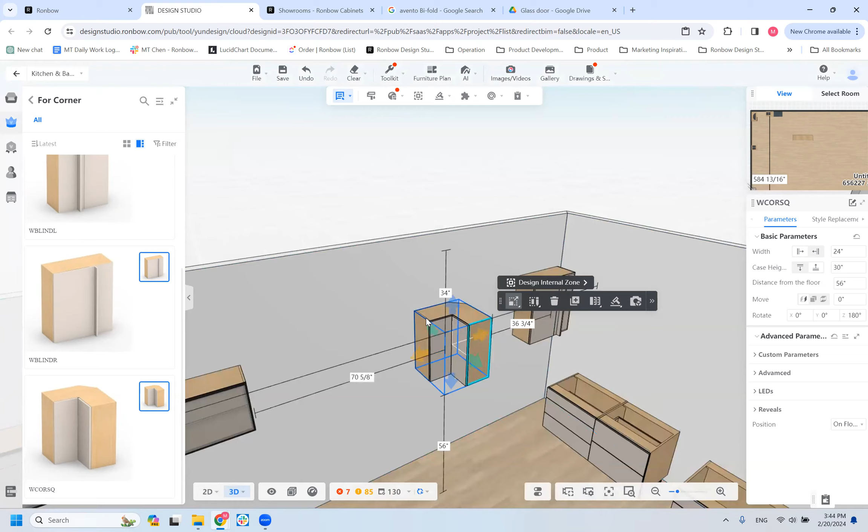So for the 45-degree corner - never, sorry. I'm sorry, so you'll never get a corner cabinet ever? No, not the diagonal corner. You can still use the 90-degree corner, like this one, or the Lazy Susan base cabinet, or the blind corner, but we do not offer the 45-degree diagonal corner. Does that answer your question? Yes, thank you.

One more thing to mention on the 90-degree corner: for the blind corner, during installation, the contractor can always adjust the width of the filler or the space behind the blind corner. But if you have a U-shaped kitchen design with two corners, do not use the 90-degree corner cabinet on both corners. You want to make sure at least one side of the corner can be adjustable, because the 90-degree corner has no adjustable room - there's no way to adjust the filler or the space behind this cabinet. So do not use 90-degree corner on both sides of the corner.

The wall open box is just the same as the base open box. The bounding box depth here will just be the cabinet depth that you want to align with. The actual depth is right here, which will be aligned with the cabinet door - exactly the same logic as the base cabinet.

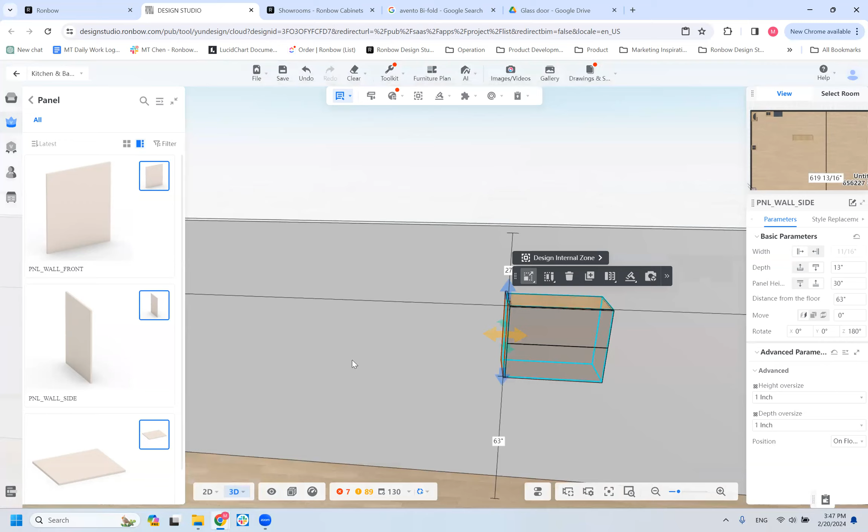For the wall side panel, one more thing I want to mention: if you have a molding on top of this wall cabinet, we want to make sure - for example, if the molding is 3 inches - the height of this panel covers the molding. So for example, here I have this wall cabinet, it's 30-inch height; if I have a 3-inch molding, I want this end panel to be 33-inch height. So later on, when I add molding on top of this wall cabinet, the molding will be on the front only - I don't want the molding to wrap around this wall cabinet, that way I won't see the joint line on the side of the cabinet. Does that make sense?

Okay, and then the next panel, the wall front panel.

MT, I hate to interrupt, but I do have a question on that wraparound. I had to step away, but why is it you just have the end panel on one side where the molding's going? Why not both sides?

Okay, so it depends on the design. If you have a wall cabinet just floating like this, yes, you will have a panel on the other side as well. So yes, if you have both sides exposed, you will have an end panel on both sides.

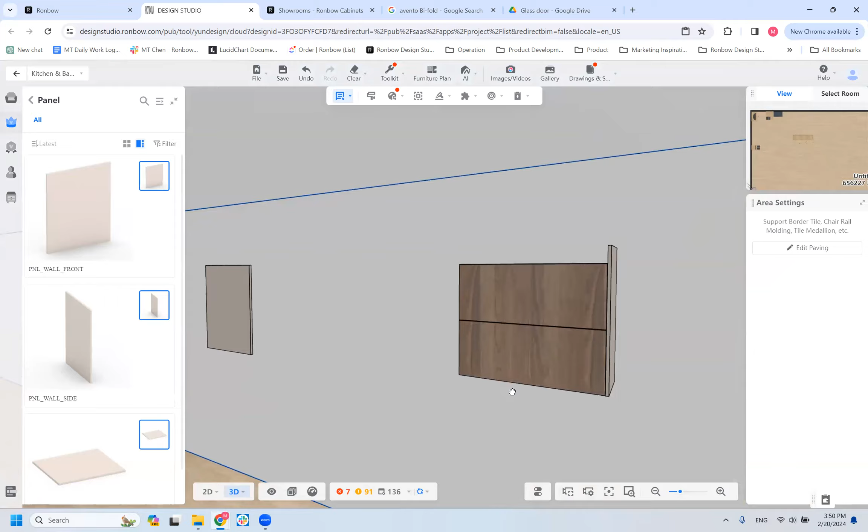Okay, yeah, that's something the engineer team is working on. Later on we might have the option to have designers select, for example, left side I want the finished side, right side I want the finished side, but that's not available right now.

Okay, and then for the front panel, it's basically the same thing as the base front panel. It's designed to have the exact same reveal as the wall cabinet. So if a customer wants a thick panel on top of the wall cabinet or on top of their appliances to cover any kind of gap, and they want the panel to be the exact same size as our door front, then we use this front panel with all the reveals.

Okay, and then again, we'll have this horizontal panel for the wall cabinet as well. So this horizontal panel here, it can be used underneath the wall cabinet.

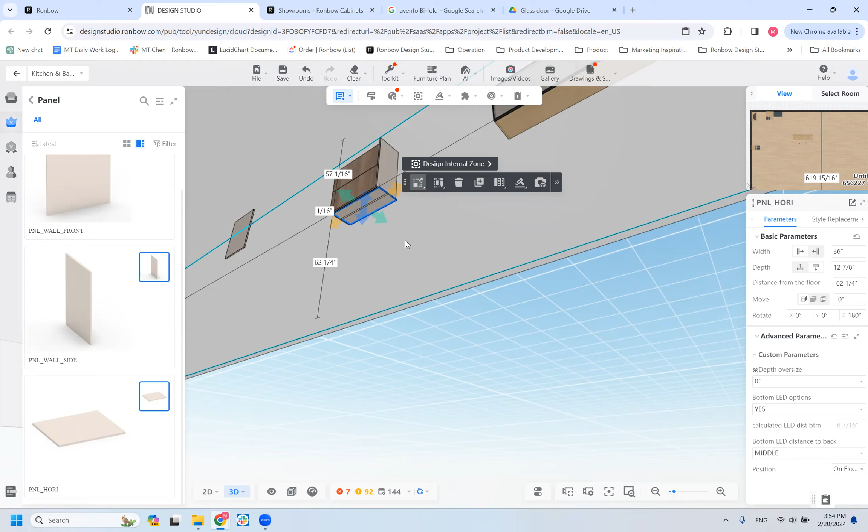Maybe I missed it, but when you put that bottom panel on, do you have to move everything up so it's not sticking out from the door? So, depends on the design. I'm not sure if I understand your question correctly.

So when you apply that bottom panel, that panel will be sticking out from the bottom, past the bottom of the door, correct? Yes. So do you have to move everything up?

So in this case, the solution will be: if the customer does not want to see this bottom panel, the option is on this wall cabinet. We have this wall bottom up feature, even though the customer does not need a handleless option. You can have a 3/4 inch wall bottom up, which will be the same thickness as this panel, and then move this panel up another 3/4 inch, so 63 inches from the floor. Now from the front, you will not be able to see this horizontal panel anymore. But from a 3D view, this panel is covering the bottom of that wall cabinet.

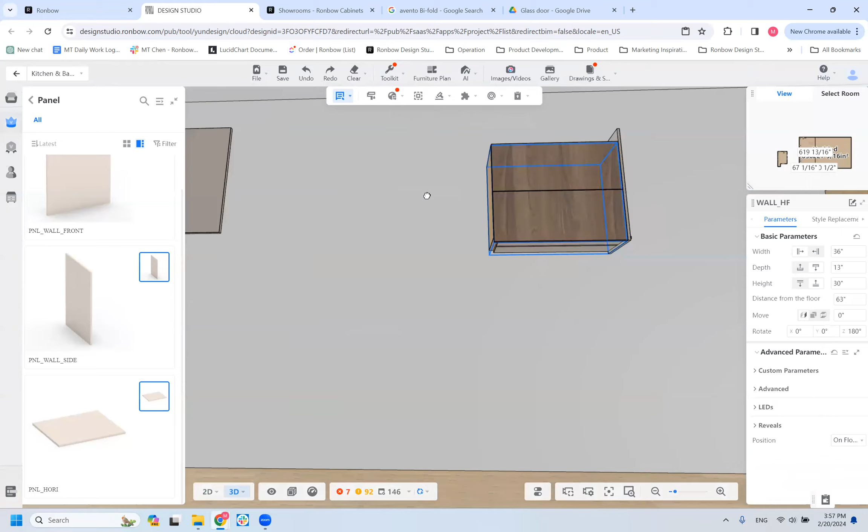So in this case, if I have the wall bottom up set at 1 1/2 inch, and then I still have this horizontal panel on the bottom of the wall, that allows me to both cover the bottom of the wall cabinet, hiding this panel, and there will be a gap between my front door and this panel, allowing me to open this front door from the bottom of the cabinet.

Okay, question real quick - so on this program, wall bottom up means you're just shortening the length of the cabinet, but not the door, instead of meaning where you're placing the cabinet? Yes, the wall bottom up means we're changing the cabinet carcass height, or the cabinet body height.

Got it. Okay, any other questions?

Is there a button that says I want the cabinet to be this high from the bottom of the floor, or this high from the ceiling? Oh yes, it's right here. I would say both ways - when you click on this cabinet, it gives you a distance from the floor, and you can set that up on the cabinet level for each cabinet.

Same thing on the base cabinet - because for the base cabinet, you can always remove the toe kick and have a floating cabinet, and here is the distance from the floor. Or on the drawing itself, you can click on this cabinet and it will show you the distance from the cabinet to the floor, and the distance from the cabinet to the ceiling.

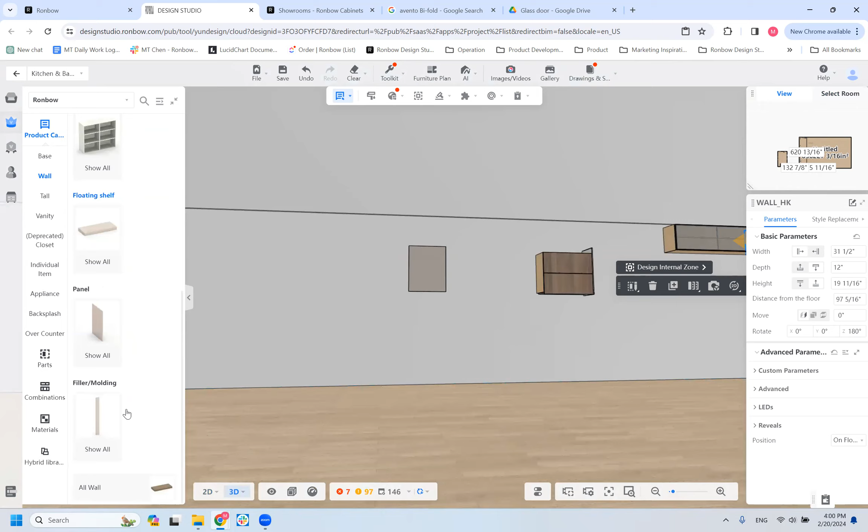Okay, so we move on to the floating shelf. For the floating shelf, again, as briefly mentioned during the product training, we have the thin layer floating shelf, which will be the thickness of the material, 3/4 inch, and we have the 2-inch floating shelf. One thing I want to mention here as a reminder - the floating shelf and the wall horizontal panel...

Okay, so these two things, the wall horizontal panel and the floating shelf, these two look exactly the same in the rendering, right? It is very similar, and in reality it looks very similar as well, but it's actually a different product.

So anything that's called a floating shelf will have the mounting bracket inside of this panel. The contractor will just install the mounting bracket on the wall and then hang this floating shelf onto the bracket. Same thing with this 2-inch floating shelf.

But if it's a horizontal panel, that means it's just a panel, there's no mounting bracket inside. So this panel, the horizontal panel, is designed to be attached on the bottom of the wall cabinet or lay on the top of the base cabinet as a tabletop surface. It's not designed to be used as a floating shelf.

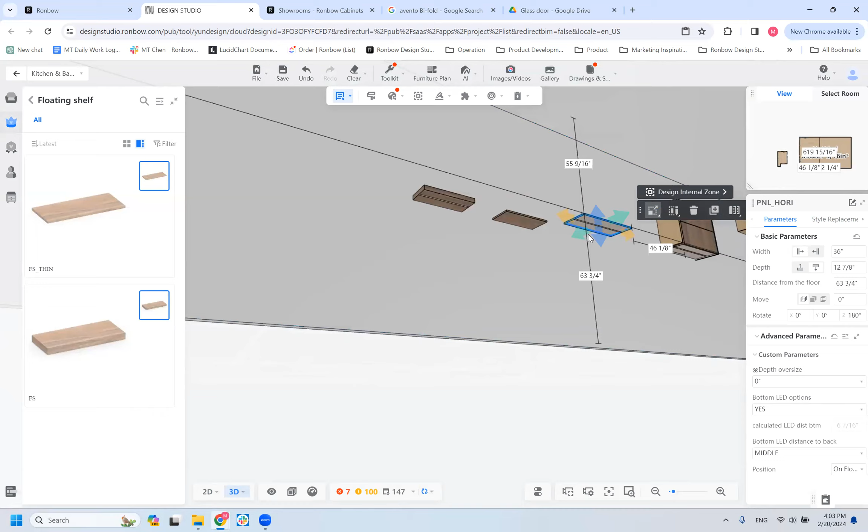So do not use the horizontal panel as a floating shelf just because this horizontal panel has the LED option, right? Because this panel is designed to be attached with other cabinets, it cannot be mounted as a floating panel. So just be aware of that.

Will the program let you use it as a floating shelf, or does it deny it? Well, the program, that's something it cannot catch—it cannot tell you which cabinet this panel is attached with. But when we check the design, if you are designing a floating shelf, make sure you pull the items from this floating shelf category.

Okay, any question about the floating shelf? No.

Okay, next one, we move on to the fillers for the wall cabinets. The filler for the wall cabinet is very similar to the base. So we will have the wall filler 3/4 inch, which you will be seeing the edge of the filler.

But keep in mind, if you have a cabinet designed with space between the wall and the cabinets, do not use the 3/4 inch filler only, because there's no way the contractor can trim this filler even smaller. There's no adjustable room on this filler anymore, it's designed to be used in between cabinets.

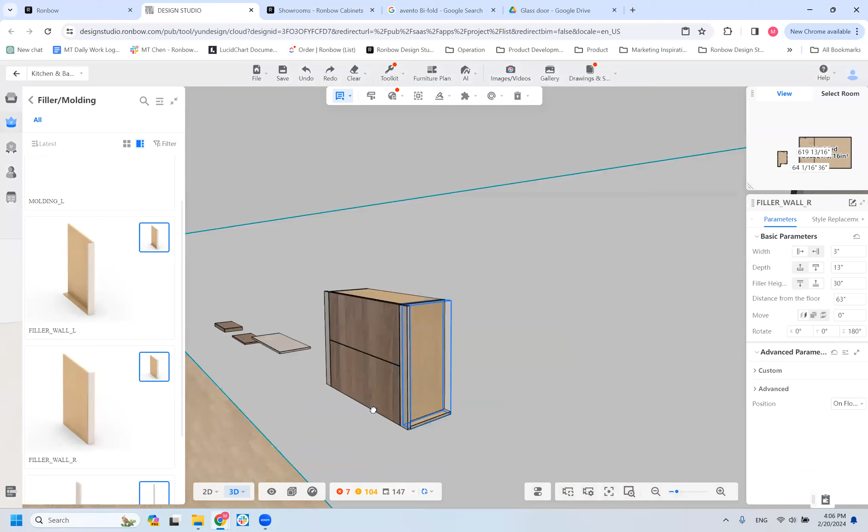Okay, so the L-shaped filler on this cabinet design here, the basic function will be changing the width and the height, same as a base filler. But for the wall filler, when you have the wall cabinet with the bottom-up feature, you want to make sure that all the filler will be at the same height and the same location.

So for this wall L-shaped filler, it does have the wall bottom-up feature as well. If you have a wall bottom-up feature set up on the wall cabinet, let's say this cabinet has a 1.5 inch wall bottom-up, you want to make sure you did the same thing on your wall L-shaped filler—wall bottom-up 1.5 inch.

Okay, so now you see on the right-hand side, the bottom filler is aligned with the wall cabinet. We don't want to see the filler at a different height. Does that make sense?

Okay, another thing about the filler, the wall L-shaped filler. So for the base L-shaped filler, right? Let me pull a sample here.

So for the base L-shaped filler, when you try to change the material of that filler, it only gives you one option, which is the door color material, because you always want this filler to match your door. If you have a cabinet using American walnut, the filler will be matched with the cabinet front color.

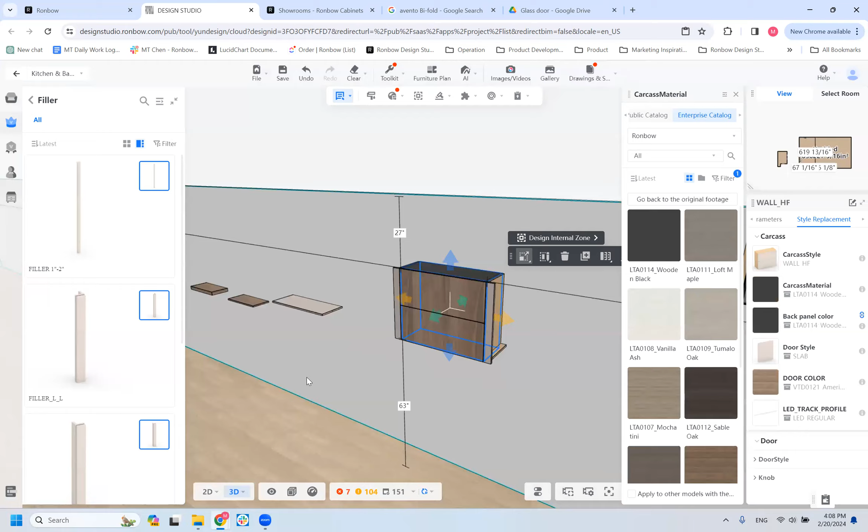So that might be a case. Let me change to another cabinet - sorry, this door just doesn't open correctly. So here's an example: once I define the cabinet size and all the colors and materials, when I change the cabinet style from here, the cabinet carcass style, it changes the cabinet but keeps all the dimensions and materials I've selected. Same thing with the bottom.

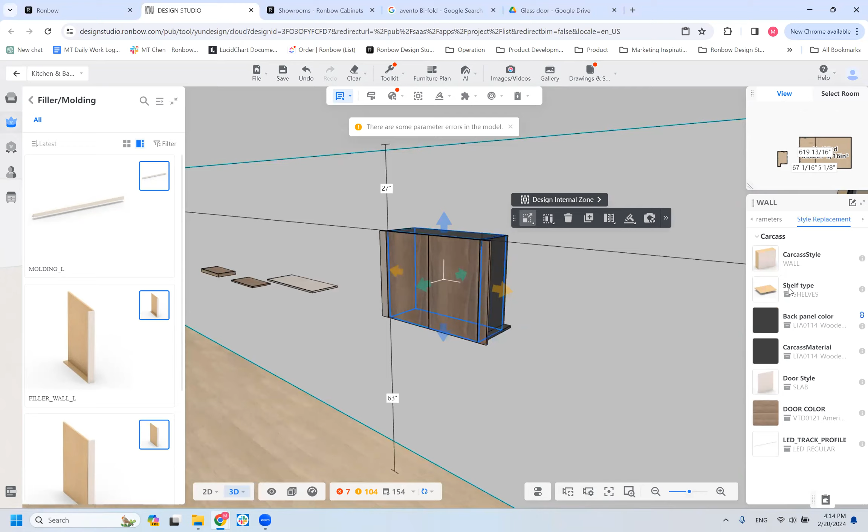For changing the colors like that, is that a significant upcharge at all? I won't say it's an upcharge, but basically all the price is calculated based on the material. So the price will be different when you change the filler material from regular plywood to a finished material. If it's just a grade A material, is that a price difference from the default material? Actually, I believe the plywood material has been set at grade A as well, price group A. So if you change into another material in the same price group, there won't be any price difference.

So for example here, in this filler, when I select price group A, it basically means that with the same item and design throughout the kitchen, if I change the material within the same price group, the price will not change. Okay, that's great. Thank you, no problem.

Okay, that's it for the wall filler. Same thing here - we have this wall molding, the L-shaped molding in the catalog, but the wall molding is not snapping to any of the cabinets. It's just placed inside of the room, and it's not the way we want the designer to apply the molding. The molding under the filler and molding category is just for customers who want an additional molding piece, in case the contractor cuts something wrong on the job site so they don't need to wait additional lead time to add another piece. It's very common for customers to request additional toe kick or additional molding, especially for the paint finish.

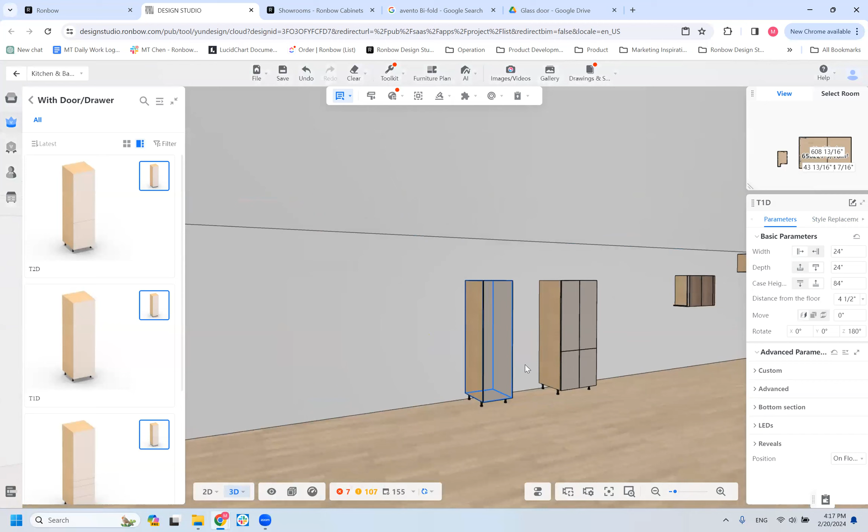Okay, so all the basic parameters are the same - width, height, depth - you can always adjust on this cabinet. We'll just go over some special features we have on the tall cabinet, starting with this tall cabinet with two doors, top and bottom door.

I think... Jeff, you done with your phone call? Let me see. Yeah, Jeff, I have unmuted your mic. Yeah, it's okay, if you want to mute your mic you can do so. If you want to ask a question, you can always unmute. No problem.

Okay, so going back to this tall cabinet here - all these features of width, height, depth are the same as the base cabinet. I'm just going to go over one of the special features for the tall cabinet. So in the tall cabinet, we have this feature right here called section alignment.

This section alignment basically tells you that, for example, these two-door cabinets have as a default - we have this cabinet selected at bottom align. The bottom align means that when you have a base cabinet, especially the base full high door, right next to this pantry, the tall cabinet, the bottom alignment on this tall cabinet allows you to have the bottom door at the same height as this base cabinet. So that's very clear.

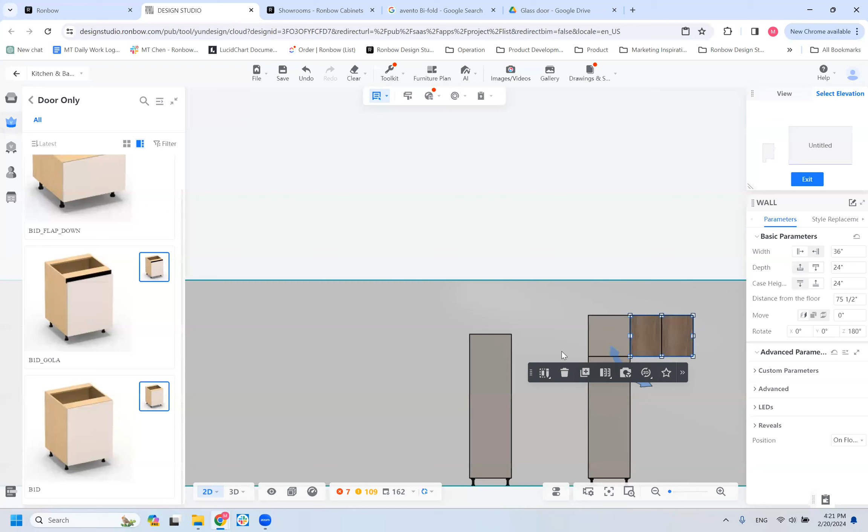The top align is very commonly used, like when we have a designer requesting this kind of design - they might have another layer of wall cabinet right underneath this wall cabinet here.

I think it's quite common right now, like we have designers doing this kind of design - tall pantry on both sides, and wall cabinet in the center on top, with the same depth as the tall pantry. So in this case, you might want to use the top section align to have the top door align with your wall cabinet. Does that make sense?

So this section alignment, the section height, for the two-door tall cabinet is very obvious - the section height means the height of the door, either the top door or bottom door, depending on if you have the top section align or bottom section align. Or another option will be the section alignment with middle align, where the door will be separated equally, divided equally on the top and on the bottom.

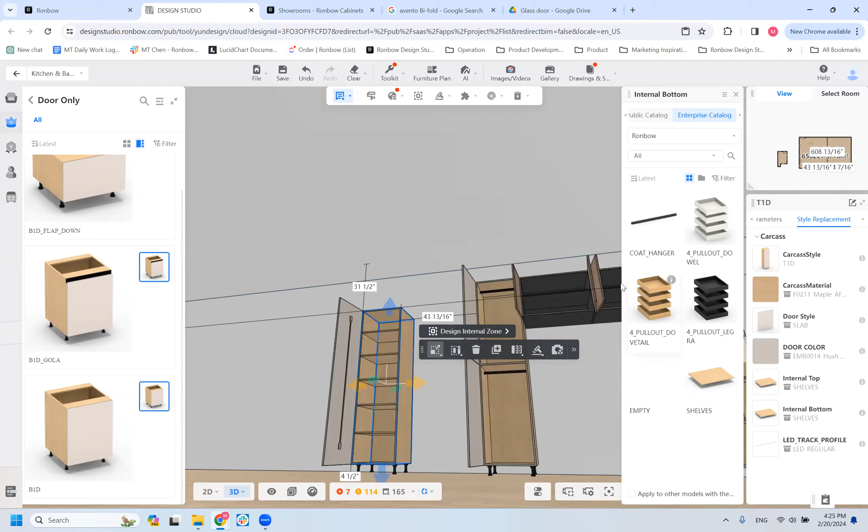On this tall cabinet, as a default, you will have the bottom section aligned, and the bottom section height will be 42. The reason is for this tall cabinet, if you want to have the roll-out drawer inside, the only way you can add the pull-outs inside the tall single door cabinet is when you have the bottom aligned at 42, since all the pull-out locations will be predefined. So in this case, once I select the internal bottom, I have the bottom with the rollout option.

What are the hangers for, what are they hanging on those? They hang on the hang rod. Yes, I've never seen them in a kitchen cabinet.

Yes, that's something we're still working on for our closet catalog, but we have a lot of closet projects with us. So basically our designers right now are just using the kitchen cabinets and modifying the internal function of the cabinet to be used as a closet cabinet.

But there's more than one shelf in those, right? Yes, you can always add more shelves or add the hang rod. And what's the weight bearing load of those rods? Could they actually hang pans on them or something? Yes, I believe the capacity of the hang rod is up to like 100 something pounds, but I can't remember the exact number. That's something I need to check. But I don't think there's any issue with the hanging capacity.

Okay, so go back to this full high door cabinet. As we mentioned earlier, the bottom section has to be 42 in order for you to select the internal bottom option to be the pull-out drawer. But if you have hang rods on both the top and bottom, then the bottom section height won't matter anymore, right? Well, it doesn't have to be fixed at 42 anymore.

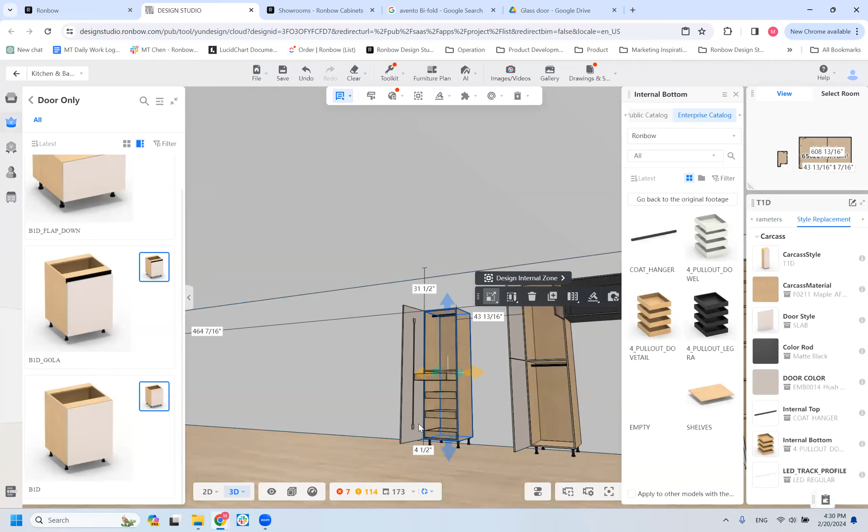I see. Okay, but I think I didn't fully answer your question yet, because the fixed shelf will still remain at 42-inch height. So in the tall cabinet, doesn't matter how many pull-outs you have, the fixed shelf will stay at the same location. So that's the current design.

So the reason is that for our pull-out shelf, the pull-out drawer, you can see that the pull-out drawer width is basically almost equal to the same width as the internal space of the cabinet. So the thing that the engineer team needs to make sure is the location of these pull-out drawers will not hit the hinge of the door. If the location of the pull-out drawer is hitting the hinge of the door, then basically that means we are not able to install this pull-out drawer.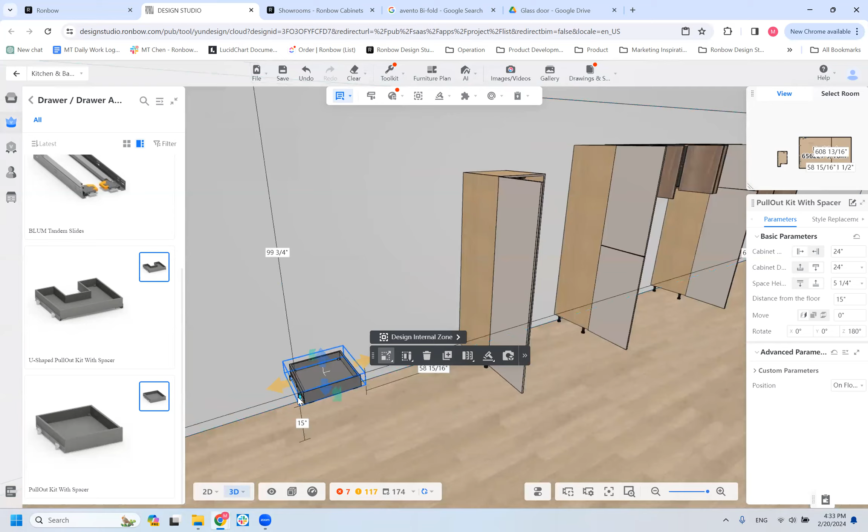So you can select, for example, if I want to install this pull-out drawer inside this cabinet right here, I have this cabinet 24-inch wide with the door open to the left. Then on this individual pull-out, I want my pull-out to fit in a 24-inch cabinet, so that's the cabinet width. And then down here, the door configuration, I have the door open to the left. So now you see the spacer on the right-hand side has been removed. You will only have the spacer on the left-hand side, which is the hinge side of the cabinet. That way the customer can install this pull-out drawer anywhere inside this cabinet, anywhere they want.

But just keep in mind, all the individual items here will have to be installed on site. All individual items means that they will ship out individually, separate from the cabinet. They will have to install on the job site. It will not be showing inside of the cabinet.

So I think one of the questions that you guys brought up earlier, for the base cabinet, we have the option without hinge, right? So without the hinge option, does that come with the hinge separately? The answer is no. If you select the cabinet without hinge, we'll just send out the cabinet with the door front, and it's not attached to each other. So in most cases, this kind of design will be used for a customer who wants to install their own accessory. But if the customer wants to add a hinge later on, here is a hinge option they can use.

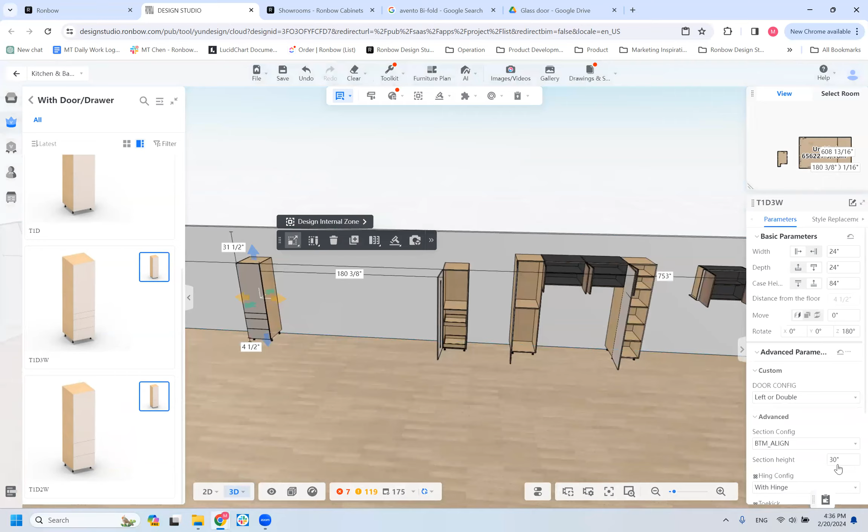Okay, moving on to the tall cabinet with drawer. We have the tall cabinet with 3 drawer and tall cabinet with 2 drawer. Same thing here - if it's the tall cabinet with drawer, we definitely want to have the bottom section align with our base cabinet. So as a default, we'll always have the bottom section aligned, with section height 30, but you can always modify the section height according to your design on the base cabinet.

Okay, and same thing - on the base cabinet, you will have the option to adjust the drawer configuration. You will have the same option on this tall cabinet as well. So for this 3 drawer option, the default will be...

6.5 inch drawer on top, and then 2 bottom drawer equal divide. But if you have a base 3 drawer cabinet next to this tall cabinet, you can do the same thing here - have all 3 drawer equal divide. That way this 3 drawer will match with your base cabinet, base 3 drawer design.

Okay, any questions on the tall cabinet with drawer?

Okay, move on to the accessory cabinets. So for the tall cabinet with accessory, it's very similar to the base cabinet with accessory, but we are still working on adding more accessory options. Right now, these pullouts are the only option available inside the tall cabinets, and the product team and engineering team are working on adding more accessories for the tall cabinets.

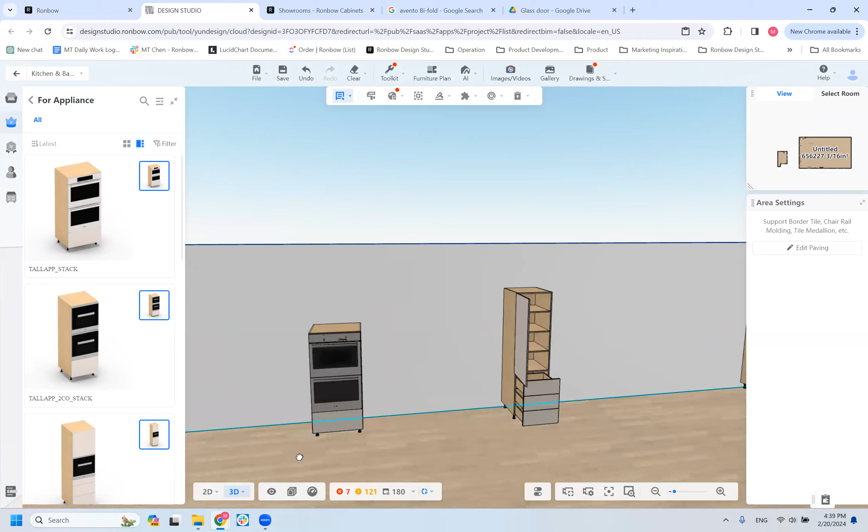Starting with these two, the tall appliances with the stack option. This cabinet you can see is basically the half height of the tall appliances. So basically these two right here, the stack is designed to be stacked with another wall cabinet on top of this cabinet.

So if you have a customer that has a 108-inch or 120-inch ceiling height, then you cannot make a single cabinet that's 120-inch height. You will have to stack two cabinets together to get that 120 or 108-inch height cabinet. So that's the option you can use on the appliances cabinet, the stack option.

Okay, and then in between these two options, we have the tall appliances stack, which is this one right here, and then we have the tall appliances 2CO stack. So the 2CO means that there's two appliances.

So from this rendering here, it seems like both of these cabinets have two appliances, but it's actually not. So this one right here - on the style replacement, you will see there's only one appliances option right here.

Okay, so keep in mind, if you are getting a double oven appliances model from your customer, even though it's called a double oven, it's an appliance that has two ovens stacked together already. And when appliance shops sell these appliances, they sell them as one unit. So in this case, we consider these appliances as a single appliance - there's only one appliances, only one appliances model number. This cabinet right here is designed to have one appliance only. You can use the double oven, which is considered one unit.

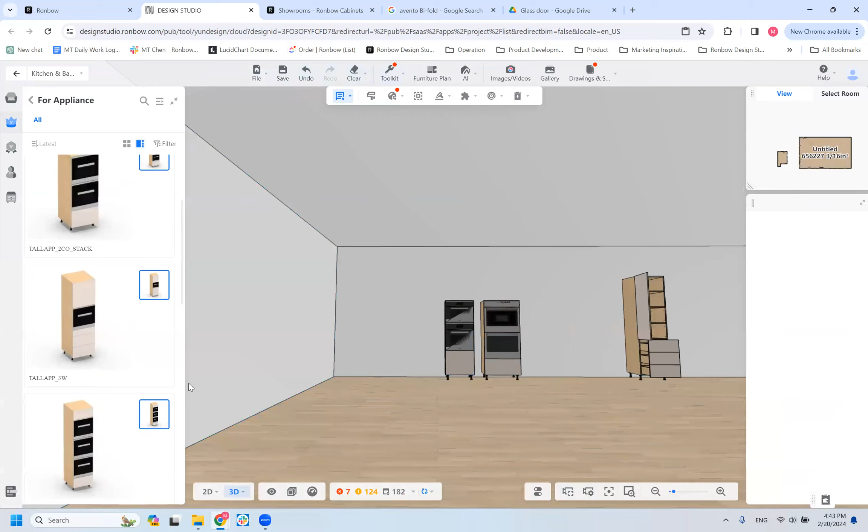And then we have the tall appliances. 3CO means the tall appliances cabinet with 3 appliances inside this cabinet. So in this case, most likely the customer will be using something like a coffee machine or a warming drawer. Those appliances have smaller height inside this cabinet. Otherwise, with this kind of design with 3 ovens, the top oven would be very high - the customer couldn't even reach the top appliances, which doesn't make sense at all. So this design with 3 appliances is usually used when they have a microwave, warming drawer, or coffee machine - those smaller appliances stacked together.

The 3CO - the C represents... I think 3CO, if I understand correctly, that's from the engineer team. That means 3 cutout, so it's 3 appliances cut out. What they care about is all the cutouts. So if you have 1 appliance, that means there is only 1 cutout. 2 appliances, 2 cutouts, there will be a fixed shelf in between. 3 appliances, 3 cutouts, there will be 2 fixed shelves in between the cutouts. Yes, C for cutout, CO for cutout.

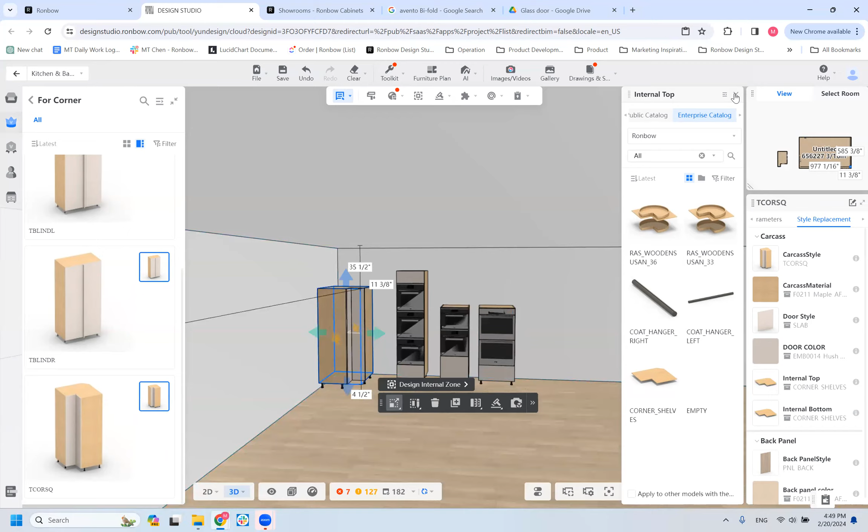And then the open box is exactly the same as the base and wall open box. The depth of the open box will just be the cabinet carcase depth, and then the system will automatically calculate the overlay for the front door.

Okay, and then panels, just the same as the base panel. The side panel will always have the front overlay to make sure the front will be flush with the door. The front edge will be flush with the door, and then the back edge will have 1 inch oversize, 1 inch oversize on the depth, 1 inch oversize on the height. So it's exactly the same on the base as the base cabinet.

And then we have the panel front, which is designed for the panel ready appliances, like wine cooler, refrigerator. And also we have the appliances with the center cutout, the front panel with the center cutout. Most likely it's gonna be used for the panel ready wine cooler, with the center cutout.

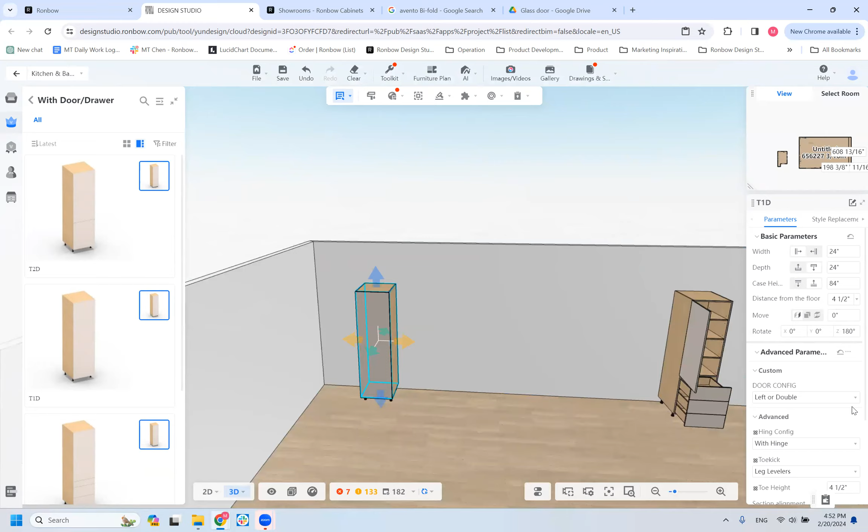We don't have a cabinet that's specially designed with the gola. So the vertical gola will be the function underneath the tall cabinet. So when you have a tall cabinet right here, you'll see the option right here, vertical gola position. As a default, there won't be any vertical gola on the tall cabinet. And then you can select, for example, I want the vertical gola on the left side.

Okay, so now you see this left side panel is set back. Right here on the left side, you see the edge right here. So that means this cabinet is ready for me to install the gola channel. So I need to go back right here, vertical gola, and then I can select my gola channel. And then before I select the gola channel...

For the vertical gola, it's a handleless solution, right? So we use the vertical gola to open our cabinet door. So if I have the gola on the left-hand side of the cabinet, that means my cabinet door has to be open from the left to the right. So my cabinet door, the door configuration has to be hinged right. Okay, so now that's the correct way for me to open the door.

Okay, so once I have the gola cut out on this cabinet, so I have the gola on the left-hand side. And then one more step I need to do is add the gola channel. Okay, so here's all the gola channel. So I have the gola center, which means that this channel, the gola center channel, will be installed in the center of the cabinet.

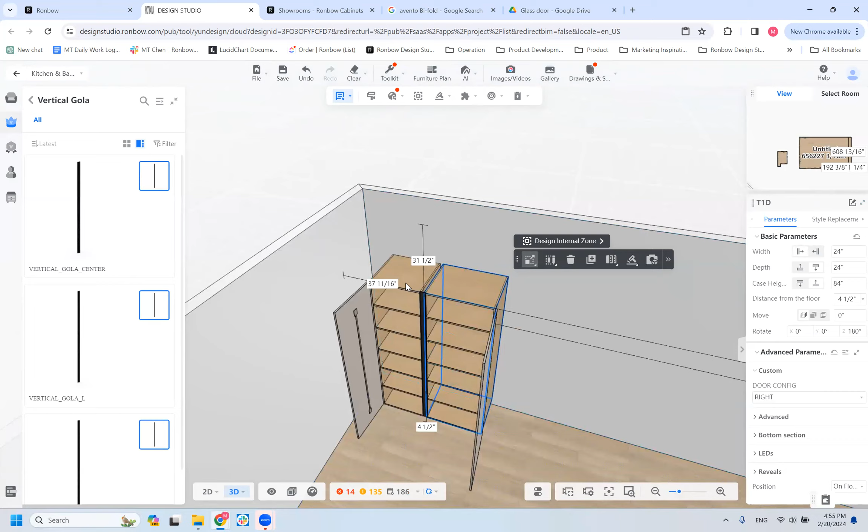Which means that when I selected the vertical gola option on my cabinets, you'll see the cabinet limitation. It doesn't allow me to select double door on this cabinet anymore. So my hinge configuration is only open to the left or open to the right. I cannot have a door that's open to both sides and doesn't have the gola channel in between. Does that make sense?

Okay, and then another type of design, I can also have the gola channel on both sides of the cabinet. In this case, I can have this gola design as a continuous piece on my wall.

Does that make sense? So on this cabinet right here, I only have the gola channel on the right-hand side, which my door will be open from the right to the left. And then at the center cabinet right here, did you see my text? Gola channel on both sides. It's great, isn't it?

Okay, so and then next one here, so when I have a single cabinet, let's see.

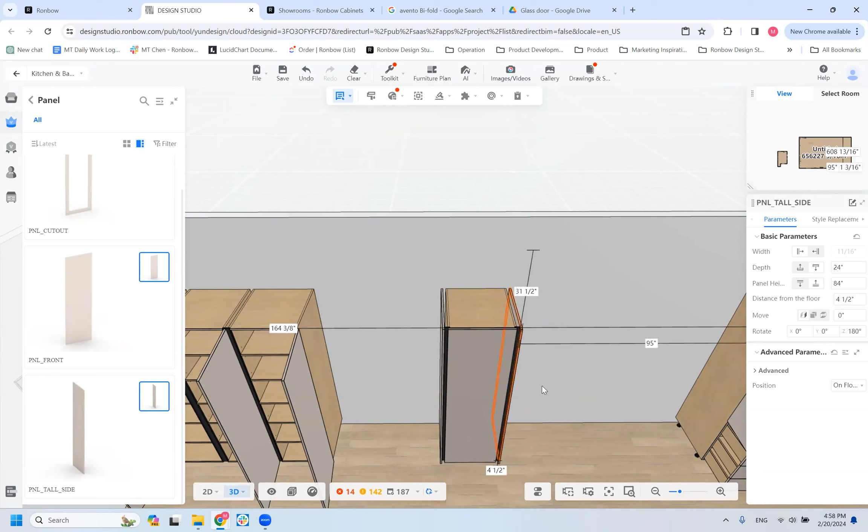Any questions on the vertical Gola design? We do have a training document on the vertical Gola design. I don't think you'll have a Gola vertical channel design very soon, but since we have the vertical Gola design training document, you can reference it at any point when you get to this kind of design.

Okay, so that's it for the tall cabinet. For the vanity, it's basically very similar to what we did for the range top cooktop cabinet - it's just a combination model with all the presets. For example, if it's a floating cabinet, the leg - there shouldn't be any legs here.

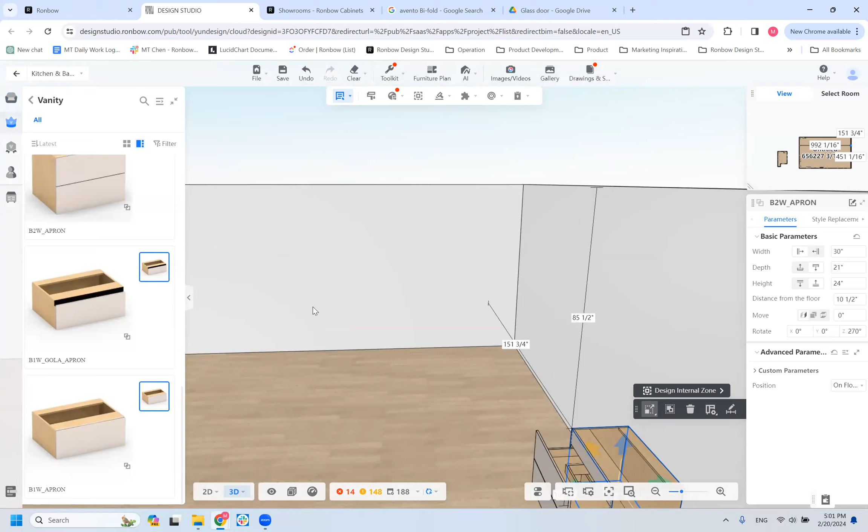But you can always make adjustments on the cabinet height and the mounting location. We're talking bathrooms, correct? Yes, these are the vanity cabinets. And all the drawers will be U-shaped drawers. So these are the default settings for the vanity.

Can we do floating cabinets for kitchens? Usually we do not do floating cabinets for kitchen, because they need the support - but that would be kind of cool.

For the vanity, the engineer team is actually looking at the mounting bracket for the floating vanity. Because right now, based on our current structure, the contractor will just install it the same way as a wall cabinet - they mount it to the wall, they screw to the stud. It's not doable as a base cabinet, which you have to screw to the floor.

As far as mounting brackets, there aren't really brackets - they just screw in from the actual box. Do they reinforce the back for that? Do they have reinforcement for the back cabinet for screwing into the wall? No, basically the contractor just needs to find the stud and make sure they're mounting to the stud. That's it.

What's the longest floating vanity length available? The longest we can do - oh, the width of the cabinet? Yes. Right now it would just be 39 and 3/8. So you couldn't make a 60-inch cabinet for a double sink? You'd have to use two different cabinets? Yes, if you have a 60-inch design, you have to use two of the 30-inch cabinets.

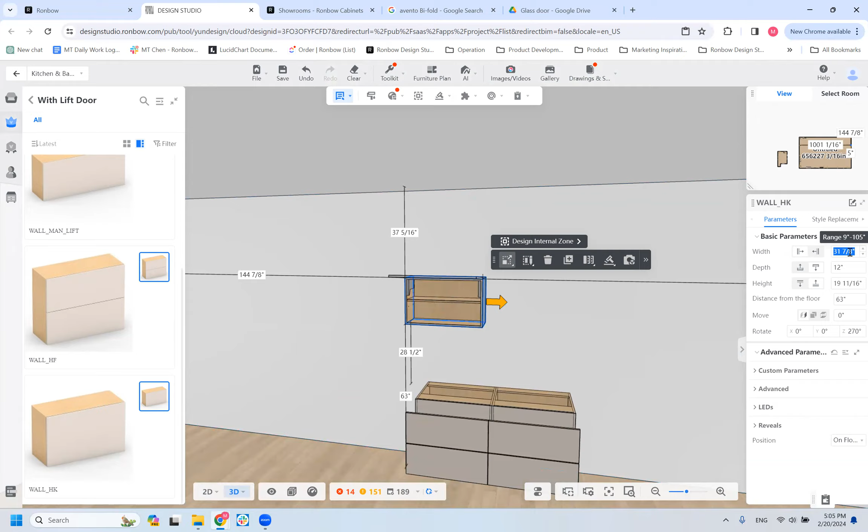It's not because of the cabinet depth, but the hardware itself. The door is supported by this hardware here. If you have a cabinet that's 70 inches wide, the support of the door will be at the center, this hardware right here. But when you have a regular wall cabinet...

Yeah, so it does pop out the error message.

So if you have a wall cabinet like this with a swing door, all the width of this door will be supported on the side of the cabinet, right? When you have a very wide door, the hinge on the side won't be able to support the weight of the door. Same thing for the base cabinet—if you have a drawer cabinet, the drawer won't be able to exceed 39-inch width, otherwise it's going to be very heavy. There's no way the drawer box can support it. Same thing if you have a swing door on the base cabinet, the hinge won't be able to support the weight of the door.

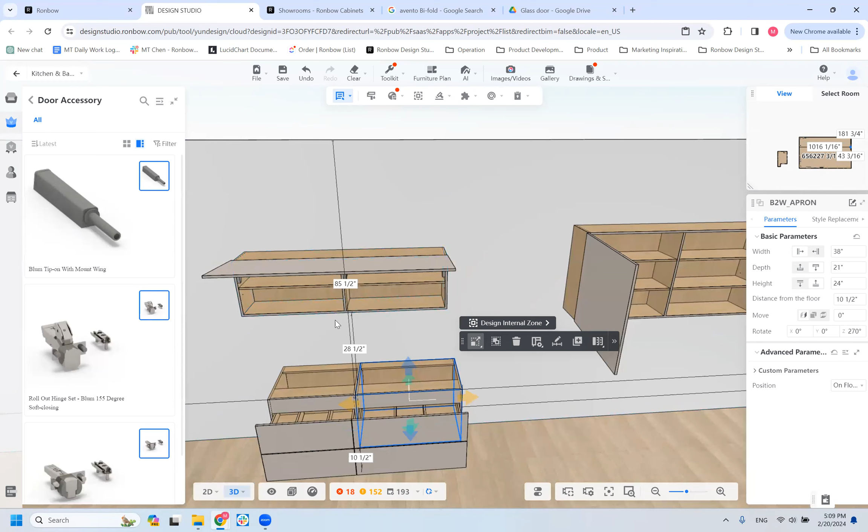Okay, so no more questions on the vanity. Same thing here, the individual items we have gone over already. We have the individual item for the drawer slide if the customer wants to add it on later. We have the individual item for tip-on, and individual item for hinges. For all these like tip-on, any additional features, at the beginning of the design make sure you communicate with the customer and add it to your design at the very beginning. This is just for a customer who changed their mind or wants to replace a couple of items. So all the individual items will not be installed inside of the cabinet.

Okay, and then we have the cabinet accessory, the edge banding. In some cases, if the customer wants to order additional edge band, just in case the contractor needs to cut something or modify some panels on site, we can order the edge banding separately.

And also we have all the electrical parts for LED. For all the LED, same thing—once you select the LED option on your cabinets, all these LED components will be calculated by the system. So when we send out the cabinet, it will come with all the LED components already. But if the customer decides to add additional LED, like power supply or additional LED strip, they can do it as well. So here is just for additional LED components.

Are the cabinets shipped built? Sorry, are the cabinets shipped built? Yes, yes, all the cabinets are assembled already. Contractor will just need to install on the job site.

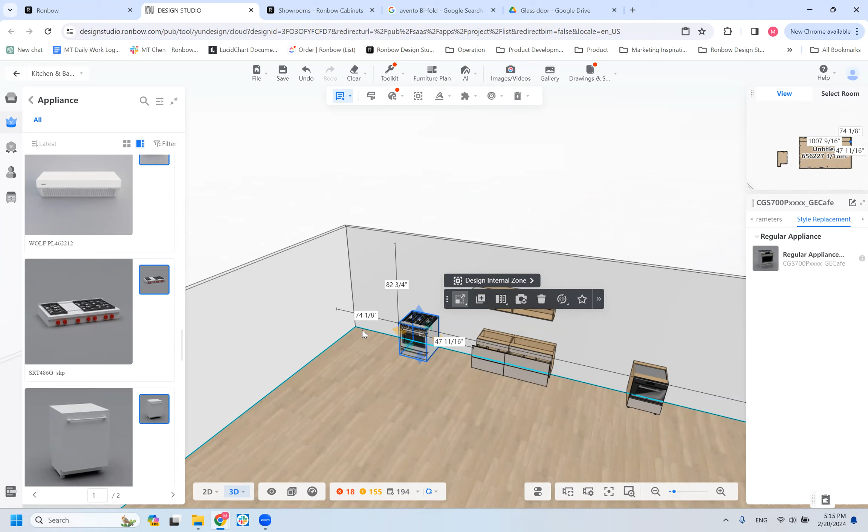Keep in mind, if your customer is using American style appliances, some might have a 1.5 inch thickness door or even 2 inch thickness. In that case, there's no way we can make those appliances set flush with our cabinet, since those appliances aren't designed for a European cabinet. But some appliances require extra fillers. So is that something we as designers would have to add in, or is that calculated somehow in the program?

Sorry, can you repeat your question again? Sometimes when there's an appliance that requires extra fillers or something to fill in the gaps, is that something I would need to add myself?

I would say yes. How this works right now is that we have a process set up for the engineer team to add appliances into the design software. All the appliances currently in the design software are the European style brands - it will fit with our European cabinets and doesn't require any fillers.

But in some cases we do have customers using American style appliances who will request a filler to be manually added to the design. The way we set this up to remind the designer is that we might have this appliance already added to the system, but it's not visible for all the designers - you cannot find these appliances in the current appliances list, which will prompt you to submit the appliances request again.